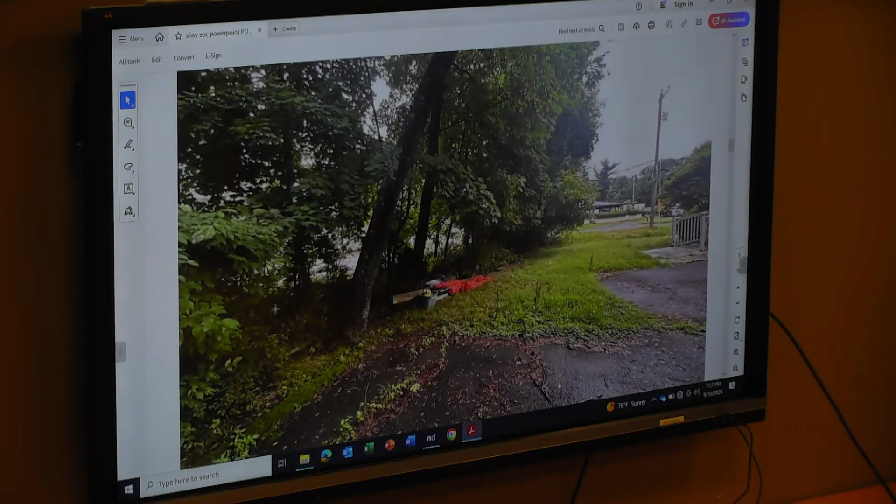And I'm turning to the next picture. This is on the north side of the property, looking over at the Japanese restaurant. You see that there? The watercourse here is not on our property, it's actually on Trader Joe's property, right in here, and then it turns, makes a sort of a 90-degree turn, and comes down across the front of our property on the east side. So it's located on our property adjacent to the street, but it's on Trader Joe's property to the north. And here's some of the trees that are along that watercourse and on our property.

So here's the existing survey. I'm going to load this up a little bit.

Okay, so you have two existing residences here, office buildings that have been used as office buildings variously. The regulated area is called out here, 50 feet from the watercourse. This is an intermittent watercourse, dry a large part of the time. The watercourse itself is here, and it was flagged by our wetland scientist, Alexandra Monk.

These buildings will be razed, and we're going to take the two properties and merge them. They'll be a little under half an acre, 0.45 acres or so. This is in a DB zone, design business zone, which is a transition zone from the central business district. The central business district allows buildings in the Corbin district, part of that. They're going to be 5 stories high and up to, I think, 85 feet.

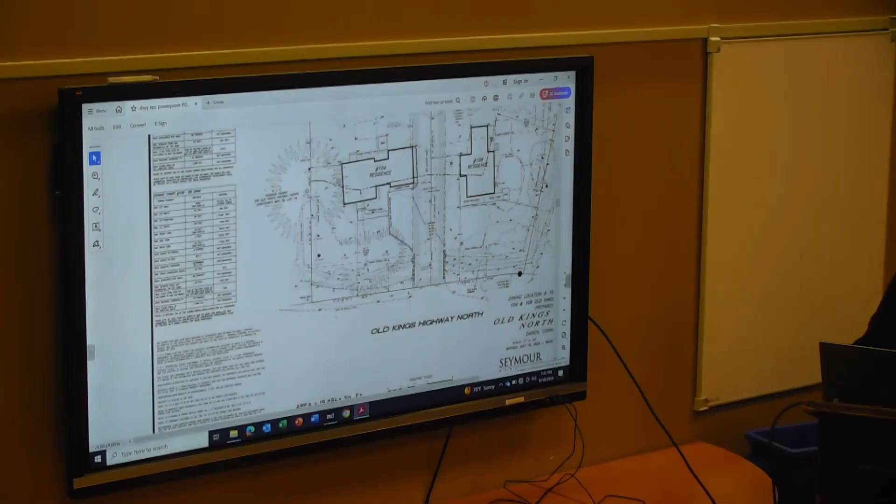These are not units that will sell for a million dollars. A 2-bedroom unit, less than 1,000 square feet, no garage, no pool, no basement storage. These are hitting a market that's different, an elderly market. Elderly under the zoning regs is age 62 and up, so this is not something a young family is going to move into. You're just not going to see that here.

And these are not top-notch units that will sell for a lot of money, but there's a need for this. This is something that's really needed, and it's part of the town plan to diversify the housing stock in town. This fits within P&Z's objectives, and it targets something I don't think another development does. There was a development on the old Noble property that Penny Glassmeyer did years ago—top-notch, really expensive stuff. This is hitting something else. People who want to retire or downsize and get rid of their stuff, because there's no storage room, this would be a suitable place for them.

In terms of impacts you need to look at, it's really the proximity of what we're proposing to the watercourse. I'd like to ask Andy to come up. We are 5.7 feet, I think, from the wetlands here, and that's the corner of the building. This retaining wall—you've tweaked that, Andy, in certain respects, and made a number of other adjustments in light of Joe Canis's comments.

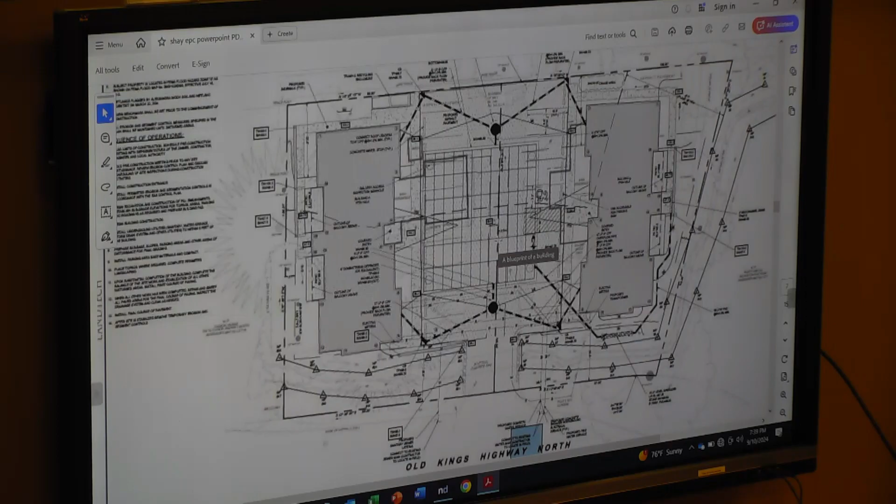It just flows. We're at about 100 feet high here and 97 feet down here, so there's a 3-foot drop from the northwest corner to the southeast corner. That's pretty gradual over the several hundred feet involved.

Water basically sheds into this watercourse, and it does so now without any treatment whatsoever. Andy's design holds on site the water you get in a 50-year storm. It pre-treats it, cleans it so the particulates are gone, and the thermal pollution that you get now will be over.

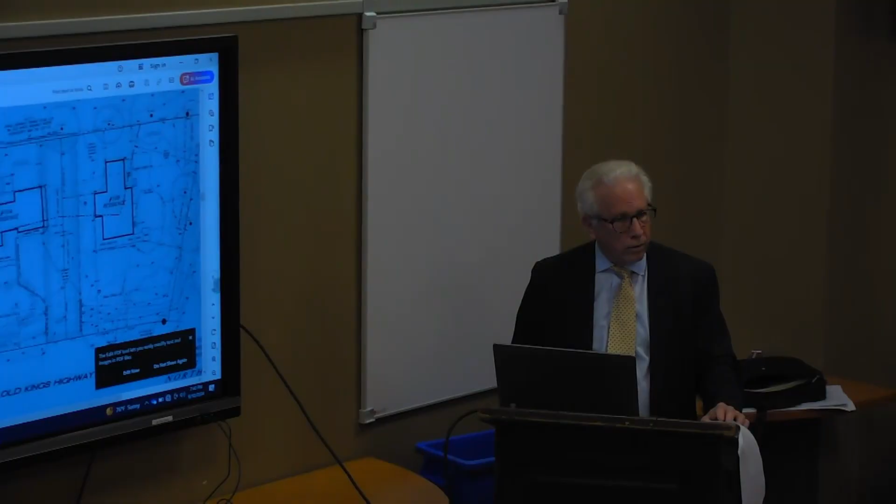So what you're going to get is a significant improvement to water quality. We have also committed to cleaning up the portion of the watercourse on our property, removing debris. If there are invasives there, we'll take care of those. We will remove the debris, and there will be an enhancement plan that Matt will talk about. So while we are close to the watercourse, and this is an intermittent watercourse in a 500-year floodplain, we are going to improve substantially existing conditions as a result of this development.

So at this point, I'd like to turn it over to Andy. Andy, pull up your plan and go through the changes, or if you want to do it just from that. I'm old school, I got the board still. We appreciate that. Especially when this isn't working.

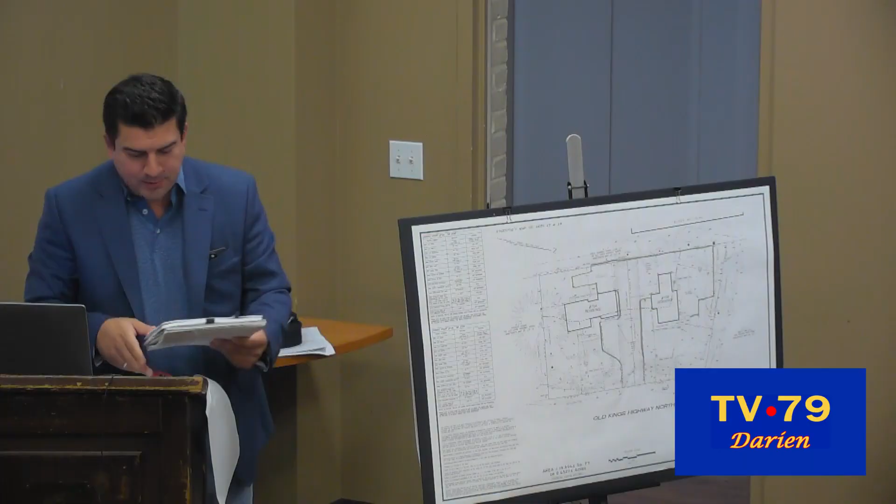Good evening. For the record, my name is Andy Sumalides. I'm a principal and professional engineer with Landtech at Westport. I'll quickly run through the existing conditions, and that's what's shown right here on the board.

As Attorney Pearson mentioned, in terms of drainage, there is no drainage infrastructure currently on the property, so all runoff goes off untreated. Under existing conditions, there's about 10,000 square feet of impervious area, of which about 7,000 square feet is driveway. That's where you get most of your pollutants, from leakage of oils and gases from cars and such. Roof runoff is, quote unquote, somewhat cleaner as it comes off of a roof. So that's what you're looking at for existing conditions.

The property is serviced by sewer and water currently, and we'll need to upgrade those facilities and utilities for our proposed development.

Under proposed conditions, we're looking at about 13,000 square feet of impervious surfaces, about a 3,000 square foot increase. But we're only looking at about 5,600 square feet of new driveway, so about a 1,400 square foot reduction in that driveway. And how are we treating that driveway and roof runoff?

We're essentially capturing all the roof runoff through gutters, piped into catch basins in the four corners of this parking court. You come in here, as you heard earlier, maintaining that existing crossing over the watercourse, and then you have parking on either side servicing each building. Drainage pitches to each corner of that parking lot via catch basins.

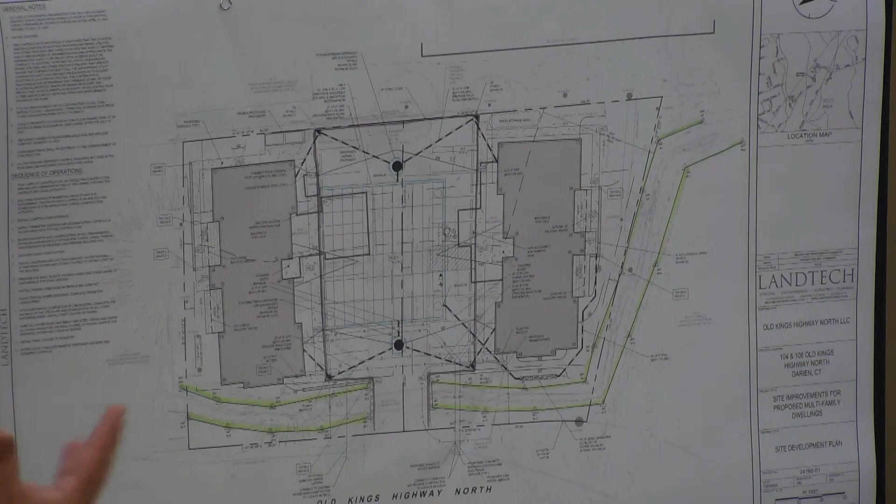Those catch basins are then piped into two separate hydrodynamic separators, basically mechanical manhole structures that treat the runoff. There are swirl chambers and a mechanical system built within those structures that treats the runoff. It removes solids, sediment, and also hydrocarbons and phosphorus. Those are mechanical systems that do that.

Those then get piped into this fairly substantial concrete gallery system, an infiltration system. These are 2-foot high concrete galleries, a very significant footprint. The purpose of that footprint is to promote infiltration and also to provide that necessary separating distance from restrictive soil conditions below it to promote infiltration.

So from a water quality perspective, you're getting pre-treatment through the catch basins, a secondary pre-treatment through these hydrodynamic separators, and then further treatment through infiltration of these concrete galleries. These concrete galleries are also sized to reduce the 2 to 50 year storm.

And as you good folks are aware, in Darien you have to do a fresh meadow approach. What does that mean? We don't get credit for that 10,000 square feet of impervious surface that currently exists on site; we need to take it and mimic it as grass. So our task is to reduce this site to basically a grass post-condition with all of this impervious surface accounted for. That is what the design does, and it meets those requirements.

Overflow from those systems for the 100-year storm would go and discharge to a level spreader in the northeast corner of the property and ultimately into the watercourse and through. So that, in a nutshell, is how the drainage is handled on site.

In terms of utilities, as we discussed, we would need to do two temporary watercourse crossings for our utilities. One is here on the northern side of our entrance, which brings in our water service, fire and domestic.

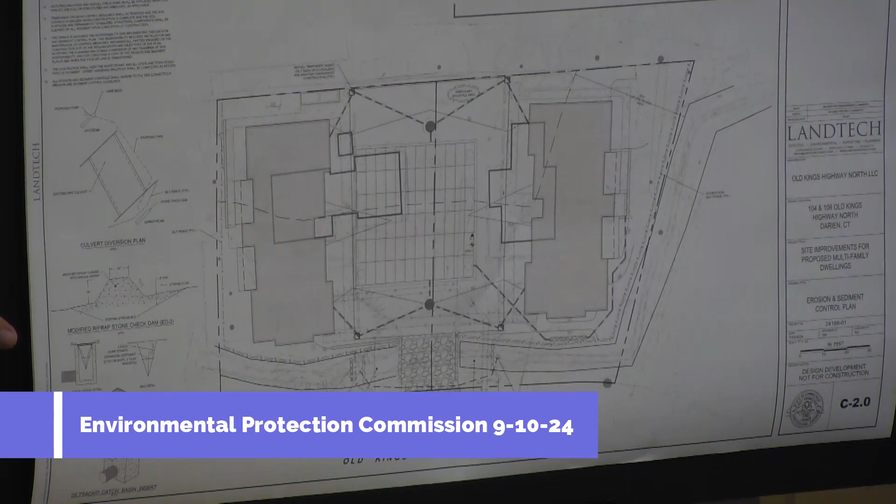And then on the south portion of our existing driveway, through the watercourse, with our new sewer line. As mentioned earlier, electric will go underground over the culvert that exists today and be concrete encased for the minimum amount of cover that it'll have. In order to get these utility connections in, we will do a temporary dewatering plan. For this temporary disturbance, we will be putting in sandbags on the northern end and a pump system, pumping the water around our work area and past.

Again, this is an intermittent watercourse. There's sometimes no flow here, so it's recommended this work is done not during a weather event. We can understand when the weather event is going to happen and propose this work when there's probably going to be zero to no flow. This work probably takes 2 to 3 days max to get that utility in. You could probably do each crossing in a day's worth of work, get the utilities through, and then restabilize the banks of that watercourse. So it's a very quick, minimal temporary disturbance that will then be reestablished, and you'll hear in a little bit from Mr. Popp how that gets reestablished and enhanced as part of our plan.

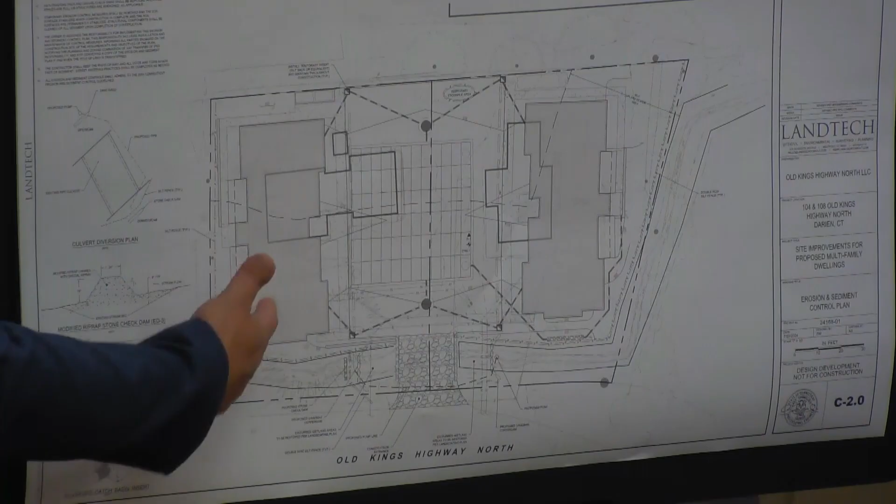Again, there's your typical sediment barriers, double row silt fence, construction entrance, and the such, street sweeping to maintain that disturbance on site during construction and prevent any migration of soils off-site and into the watercourse.

Just to jump back a little bit, we did receive comments in the last week from the third-party engineer, Mr. Canis, who's here tonight, who I think you'll hear from also. What we did in response to those comments, at a high level, is there was concern about retaining walls and how close in proximity they were to the edge of the watercourse banks.

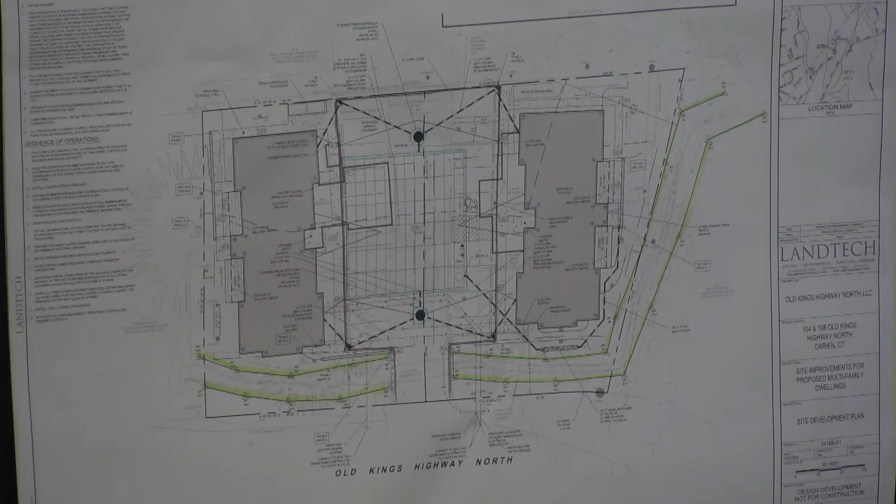We were able to eliminate the one on the north side completely. How we did that was by regrading the slope to eliminate those. We were also able to reduce this one considerably in height. Again, it'll be less than a 2-foot wall, not an engineered wall, no footing is required.

As you heard earlier, the buildings are on slab, so all you need to do is excavate about 42 inches down to put in the footing, and then you come up with your wall and then you pour your slab. So very minimal digging or excavation work is required for the installation of the buildings, for the retaining walls, and for the site in general.

The cut fill numbers on the site are very minimal. It's actually a cut site, and even though we're filling a good portion of the middle of the site to help with our drainage infrastructure, once you install all that drainage infrastructure, obviously there are voids there, so we calculated that, as well as the pavement section required for constructing this. The number is, I think, a net cut of 85 cubic yards.

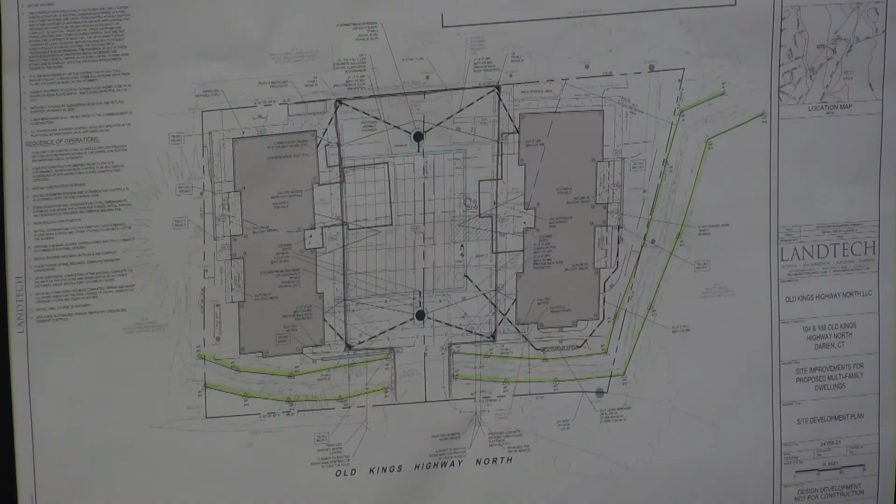So very minimal earthwork is really required and site disturbance in order to make this a viable project.

I'll just run through some of these comments from Tighe & Bond again. There was a question about the existing culvert - it is in good condition. We modified the drainage to overflow to the level spreader before we had it bubbling out of the catch basins, so we revised that.

We talked about the regrading to minimize impacts of walls and such directly adjacent to the watercourse. Some of these are just cleanup items that you already heard of. We talked about the construction of the utilities and the proximity of those utilities to that culvert, and moving the utilities further away from the culvert - correct. So just not to impact the culvert, we pushed the utilities further away to the north and south of that entrance to make sure we don't impact that culvert at all.

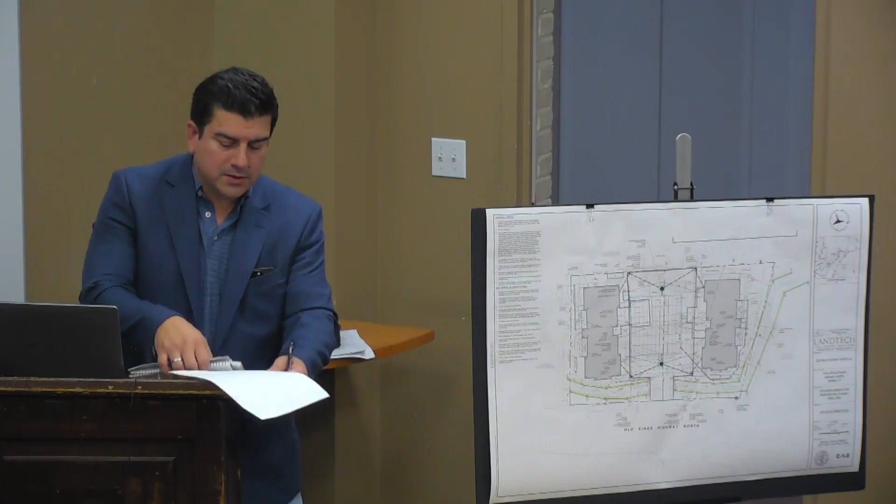And that's in general, the cleanup items that we did in response to the comments from the third-party engineer. We also beefed up the plan in terms of soil erosion, per comments from staff. So we addressed comments we also got from staff in a letter dated August 15th.

Of the items pertaining to the site civil work, items 5 and 6 were key. Item 5 was really piggybacking on Mr. Canis's report and some of those items which we've addressed, and item number 6 was beefing up the soil and erosion controls on the property, which we did. I'm happy to answer any questions, or turn it over to Mr. Popp to go over the landscaping.

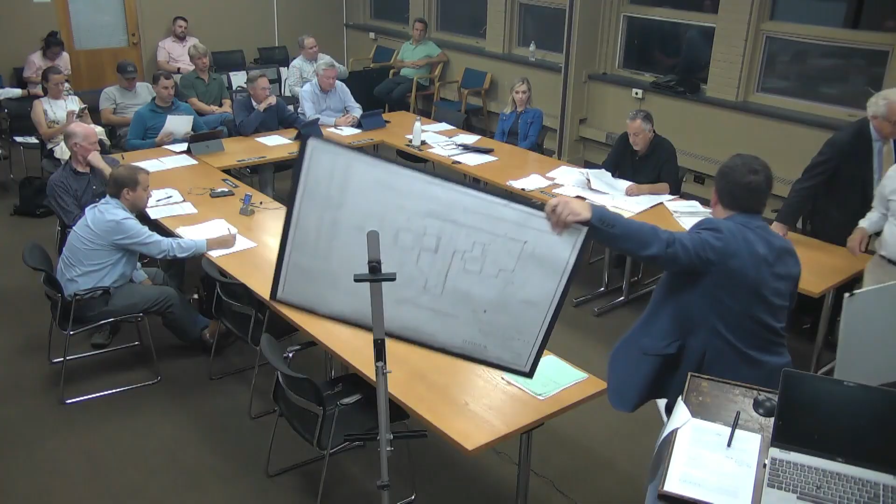Good evening, Matthew Popp, architect and professional wetland scientist with Environmental Land Solutions out of Norwalk. We've prepared the environmental assessment and the wetland landscape plan that we submitted. I was a 16-year member of the Greenwich Wetlands and Watercourses agency some time ago, and have been the Bridgeport wetland consultant for over 30 years, 32, 33 years. We've been doing that, and I've been before you many times.

Just going to go quickly over the existing conditions. As Wilder noted, there are 2 structures on the site. Old Kings Highway North is down here, with the first house here and the second house here. One thing you'll notice when you go out there is there's quite a bit of asphalt, the driveway in the front. Typically you'd have the driveway in front, maybe a little in back, but here the driveway wraps around to the rear of this house, and then wraps all the way around the northern house. So a lot of asphalt on the site.

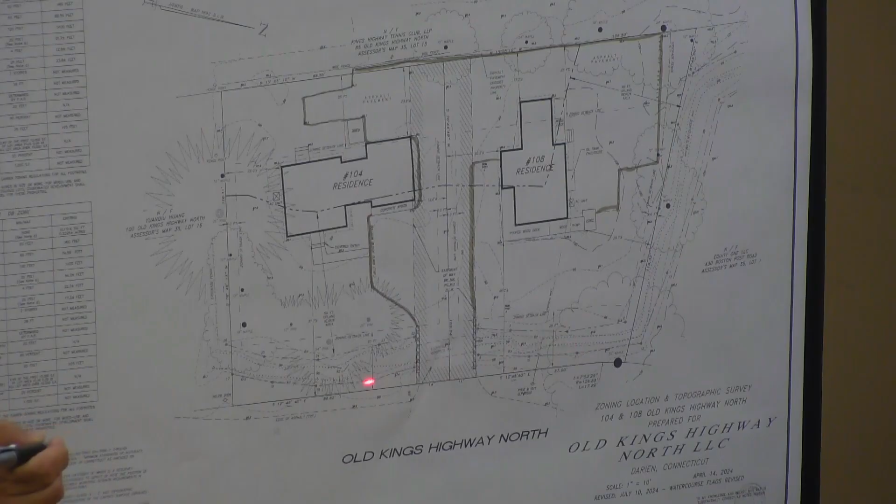The watercourse comes around just off the site on this property line, then enters the site here, comes through here, and there's the existing wetland crossing there. The watercourse corridor has a low flow channel, maybe about a foot deep, 18 inches deep by 18 inches wide. So most of the flow is in that, and when there's a larger event, it overtops that low flow channel.

The vegetation on the site has a lot of non-native invasive plants, as you typically would find in a project like this. But there is red maple, Norway maple, Ailanthus, catalpa, privet, multiflora rose, and some Japanese holly. The watercourse corridor in the front here is about 10 to 15 feet in width. A lot of it right now is maintained as what looks like lawn not too long ago that was left uncut, so the grasses are probably about a foot in height. So most of the buffer around the watercourse is uncut lawn, and there's also white pine, Norway spruce, English ivy, smartweed, jewelweed, and Virginia creeper growing among the field grasses.

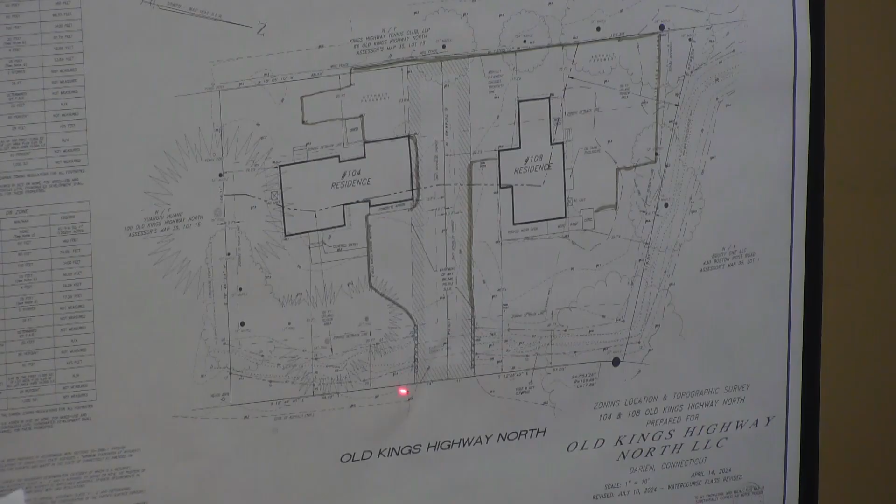The watercourse functions - we use the Army Corps of Engineers booklet for functions - are limited, mainly because of the small size and disturbed nature. The roadway right next to it is only about 15 feet or so from the watercourse corridor. But the primary function, as you'd anticipate, is conveyance of surface water. It does have some secondary functions, like groundwater discharge - groundwater that enters through here comes underground and discharges within the watercourse. It does provide some floodwater storage, as there was some backing up of water above the road. Other functions include sediment retention and nutrient removal by plants through uptake, some minor wildlife habitat, and like most wetland systems, some food for wildlife. Again, those are secondary functions.

This is the landscape plan which we prepared. Again, the 2 existing buildings come down, and we're building 2 new buildings with a central parking area here. We're maintaining that existing watercourse crossing right here. As Mr. Palomelli noted, approximately 5 trees are to be removed - 3 of them over here, and another one right through here.

The drainage, I think, was explained in detail how it's being handled. Right now, there is no drainage system, so any runoff that hits the parking areas or roofs just sheet flows down into the watercourse corridor, with no treatment. The drainage system we're proposing now has a significant amount of treatment, which greatly improves the water quality for the watercourse corridor at the bottom of the site.

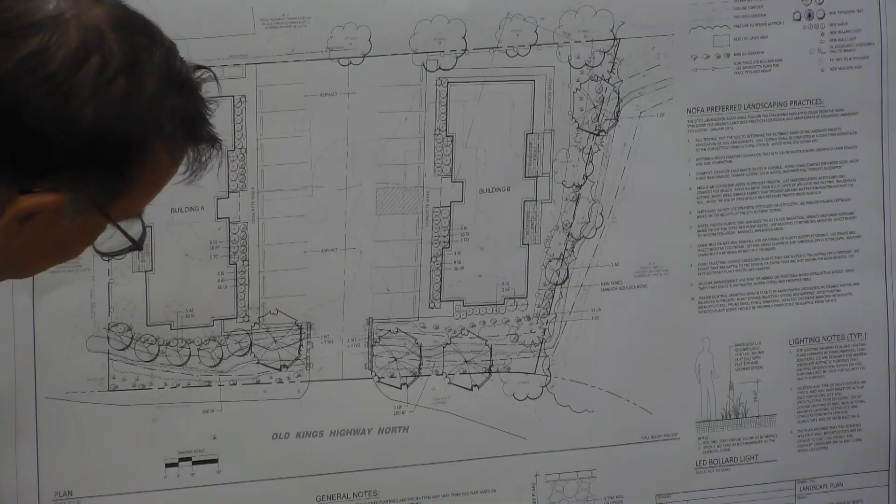And most of these plants are native. I think all of the trees and all of the shrubs, or a majority of the shrubs, are native. There's a couple of ground covers in through here that aren't native.

And just if there's any wildlife issues, just to trap wildlife or repel wildlife in a friendly manner.

Again, it's an existing developed site with 2 houses that are going to be removed. The functions of the watercourse corridor through here are relatively minor. With the drainage plan and the landscape plan, I think those wetland functions would be enhanced. I'll end with that, if there's any questions.

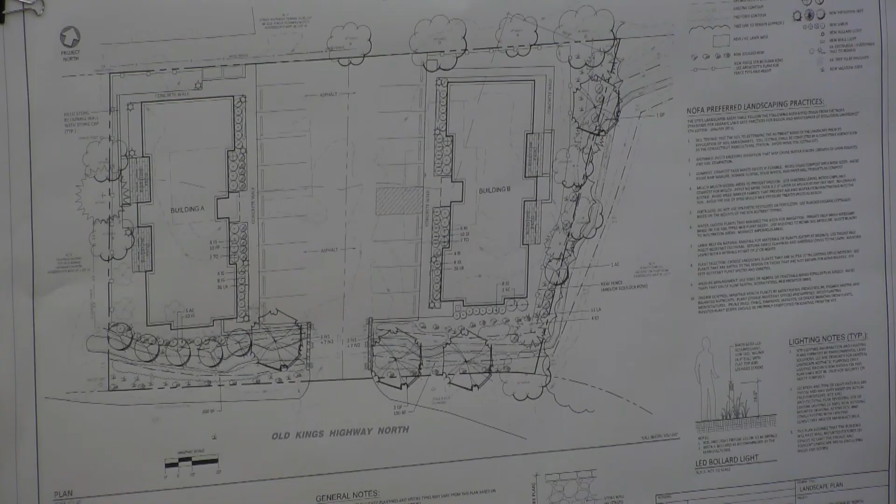I have a question. Do you anticipate any negative impacts as a result of this development on the functioning of the watercourse? No, the only issue I would have is just gotta make sure that we install the utilities when it's a no flow period, and that would be a short-term impact, so no long-term impact.

As long as you're on utilities, Counselor.

Matt, I had a question as I was reviewing everything in the package. So those utilities, the water and fire suppression, are they going below the watercourse? Yes. Bring the expert in? We gotta bring in the engineer. Yes, they are. Good, okay.

The water lines are typically installed below frost, so they don't freeze. So yes, they'll be below the water.

And then the electric runs across the top of the culvert, is that correct? Correct, and it'll be concrete encased around the top of the culvert. Currently, electric is served overhead, but with any new developments, Eversource likes all their lines buried.

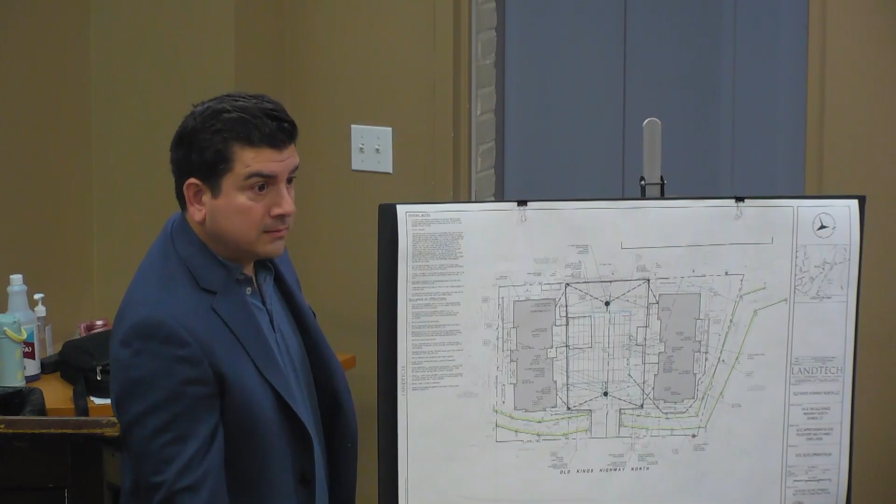So we'd be taking that overhead wire and burying it. Since these are all apparently electric heated units, what's the amperage load that's going in there, and what kind of panel are you going to have? To get heating units in all these units, you're going to have quite a bit of load.

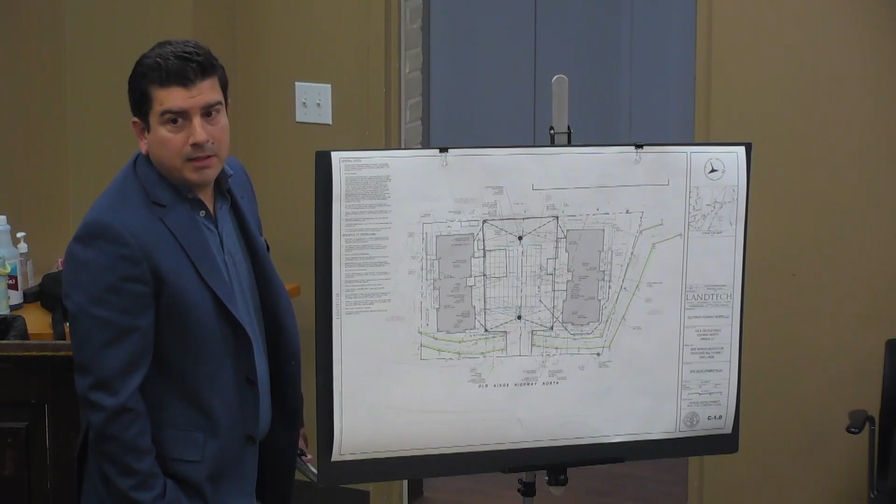Overhead and underground lines, right? It's a little outside my expertise, but I'll try to answer it. We are proposing a new transformer on site, and that's sited on our plan. That transformer is not sized yet. We haven't gone and met with the utility company to determine loads or anything like that. That would be mechanical, electrical, and plumbing engineers when they get involved with the next phase of this. If we successfully make it through your agency and then planning and zoning, that's typically when they get involved, when we get into construction drawings, and then the electrical engineer will provide a load letter to the utility company, and then they'll assist with sizing.

Just thinking of the conduit from the Eversource line on the street, you're going over the culvert, so will you have the capacity to do that over the culvert? Yeah, I don't anticipate it being an issue.

For the record, all utility to building A and building B will intersect the watercourse below the frost line of the watercourse. And the frost line being 42 inches? Correct. So is that 42 inches from the bottom elevation of the watercourse? Correct. So for the record, for building A, what would be the bottom elevation of the watercourse today? So the bottom is roughly elevation 96, 95.

For building B? So that's for these building water lines that are going to cross. So that's for building B, right? 96? So this water line comes through and it services both buildings. Does the same hold true for all the other utilities? So there's one line that comes in for fire and one for domestic water, so it's two separate water lines. That'll come in at one crossing here and then split off and service both buildings.

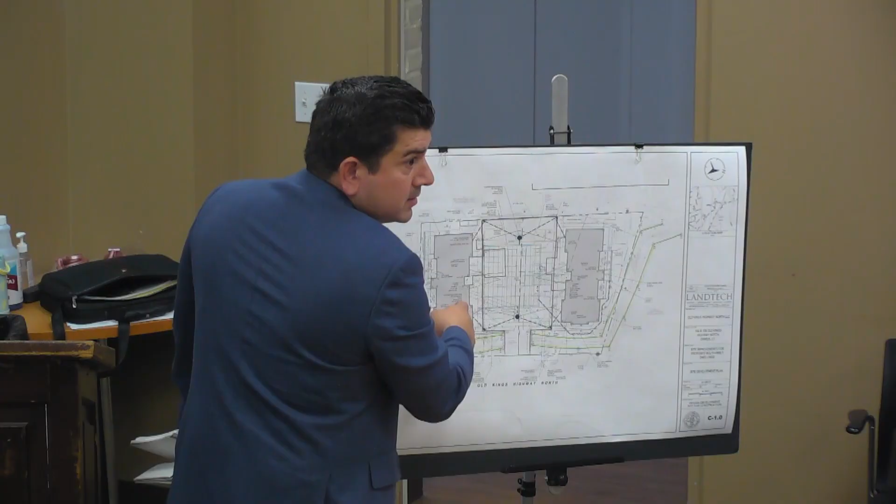Electric will come from this pole underground over the existing culvert to a transformer here, and then that transformer from here will feed both buildings. The sewer will come underground here, and it splits off in two directions.

Is the electric in, let's say, a 4-inch pipe, a 6-inch pipe? There'll be multiple conduits, right? You'll need your primary service, then your secondary, your telecom. All that will be in a trench through here, depending on how many conduits we need. So it's usually one duct bank.

What is the depth of the culvert currently? Currently, there's about 18 inches. So basically what you're going to do is excavate the top of that culvert, lay all of your conduit, your chases inside of the top of that culvert. Correct. And then pour concrete back on top of that.

Correct. And I would imagine a large portion of the top of that culvert would be designated for the electric utility. Correct. So all your utilities will be in that duct bank, and they'd probably be in one line, right? Instead of, sometimes you could stack them, there's different orientation, there'll be one line conduit, in a row, going over the top of that culvert.

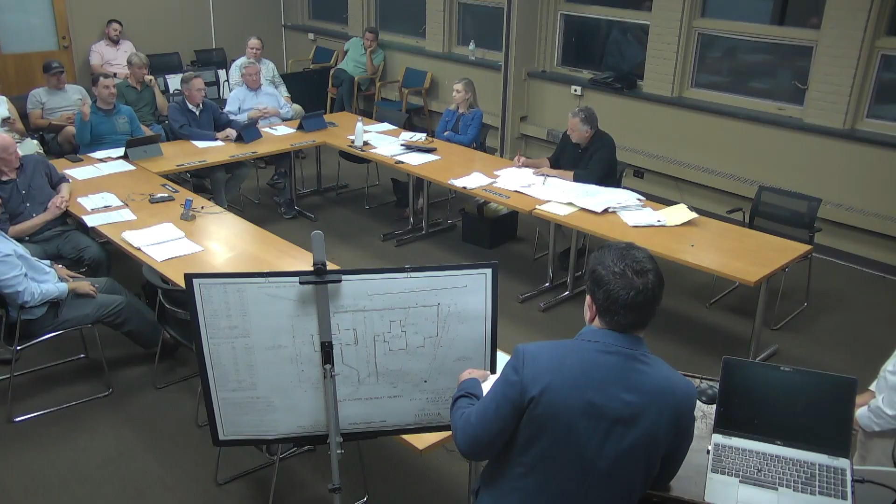So it's germane, because it would be prudent for the commission to know if there needs to be construction on that culvert to meet ingress and egress traffic codes. Because, to the eye, it doesn't appear to be particularly large. When you put two commercial structures on there, one would think you need an emergency vehicle going in one direction and a fire truck maybe going in the other. Can the two fit on that culvert?

Does that meet DPW regulation? I haven't asked that question. We did have a traffic engineer look at it, it's sufficiently wide. And then the other question would be, is it sufficiently strong to accommodate a fire truck going over it and an ambulance going the other way? It's a good question, I can't answer it now, but I'm happy to check. Sure, it's 22 feet wide, and typically you need 20 feet wide for emergency vehicles.

Low volume roads are 20 feet wide. I don't know the regulation, I'm just thinking, it's an old bridge, it's an old overpass. Maybe you need to do work on it. Any other questions?

Go ahead, I have a couple questions. So you mentioned that the underground detention is capable of handling up to the 50-year storm. But in the event that we have the occasional 100-year storm, what happens? So in a 100-year storm, this all fills up, and then it starts coming out of this level spreader.

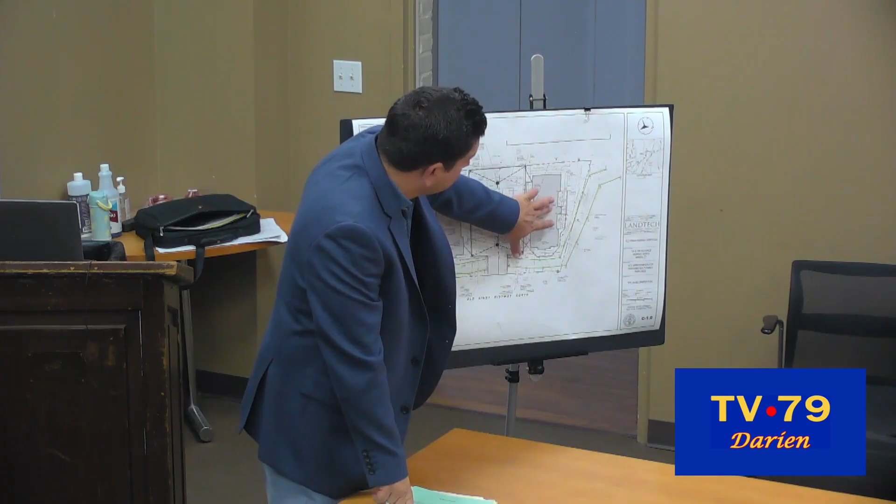It's more of an egress for emergency, not getting into the architecturals, but this is for emergency exit out of the rear of the building. So this is at a lower elevation, so we have a drain here that picks that bit up and directs it to that level spreader. The rest of it, the majority, would sheet flow off, like it does today.

And the size of the level spreader is? The length of it is 15 feet. Okay. And then I just had a question, I think it was in your stormwater management report, it was mentioned that stormwater discharge from the site will comply with applicable rules and regulations of the town of Darien. Can you discuss specifically which rules and regulations you're referring to?

And let's see, I have some, these units are for sale, not for rent, I think. Not necessarily. Oh, not necessarily. Sean is going to look at that, he may decide to rent. Okay.

And can you discuss, you discussed how the watercourse is sort of intermittent, for rain and things like that, runoff. Where does it flow to? It flows to the south and crosses over towards the Goodwives River, I presume. So it meets up with the Goodwives River? Yeah, correct. And on the north side, it's not on your property, it's on the neighboring property.

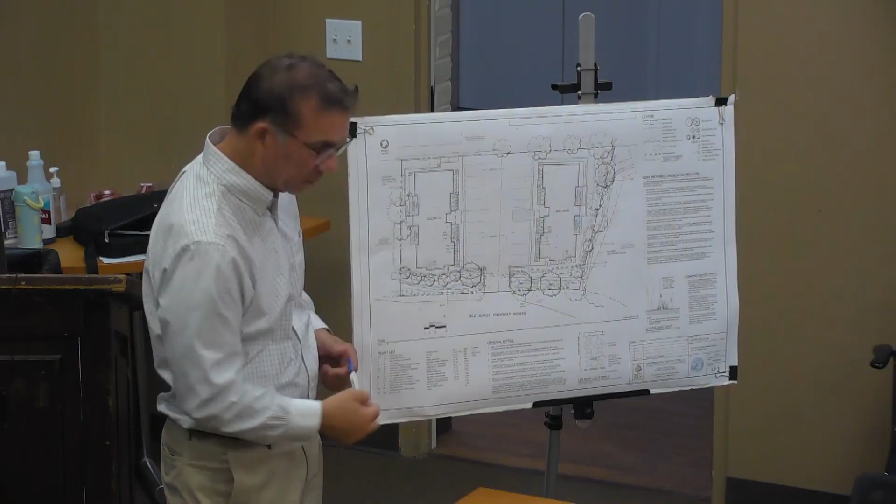On the west side of it they're proposing winterberry, which is kind of a smaller one, grows 6 to 8 feet in height. Those are kind of along the boulder demarcation. In the back we have inkberry, which is an evergreen, a native plant, a little bit native further south than here. The deer don't eat it, so that's kind of why I use it.

And I know sometimes cultivars are brought in for aesthetic reasons. Well, a lot of times too, if you specify just a straight version of a plant, I'm not sure what you actually get once they come from the nursery or once the contractor brings them on site.

The winterberry, I did specify 2 cultivars, male and female, so that we get the berries. The ilex for the inkberry, I did specify one that stays a little bit lower - it's probably the one most used.

So whenever possible, especially in the regulated area, the true natives increase the conservation value of the regulated area as much as possible if we can use those.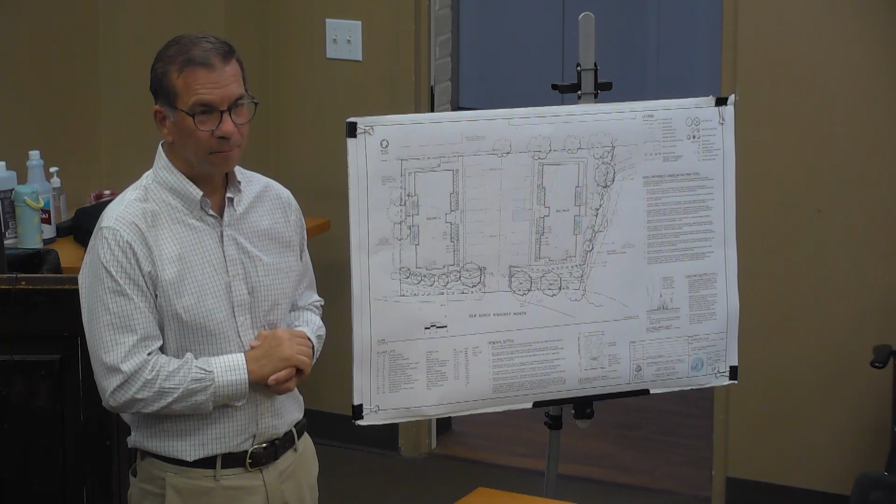Sure, I can. I noticed on the side of the garage, I was there today for my second visit, and I noticed there's a whole array of beautiful blue lobelia growing there, and the bees were just loving it. The deer didn't eat it? No, it was in beautiful condition. I was wondering if there was any way you could put that aside and reuse it somewhere? Certainly, but where was it?

It was on the side of the garage. I'll go check, I'll go look. Yeah, it was doing very well, and the bees were really enjoying it.

And then I think against the west side of the property, it was recommended that some trimming be done to the trees, and there's some invasive stuff there too, the euonymus. I don't know if that's on your property or not. I believe it is off the site. So again, if you take out too much stuff, you're going to have to replace it.

I think some of that stuff might provide some screening, but we're happy to look at that if you want. The deer don't eat it though. Right, they do not, that's true.

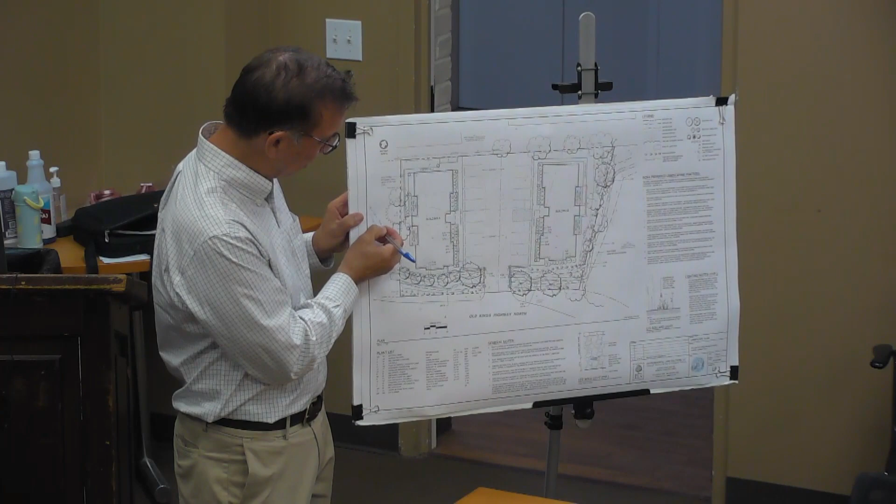I appreciate that you put in here the organic land care provision, but going forward, is there some way to institutionalize that? I don't know if it makes sense to put it in the maintenance and operations manual, like add a paragraph. I would think there'd be an association taking on or maintaining the site, and I would think that would go into that.

Because we did this for another property, it got put on the land record as well, just in case the property changes hands. Yeah, because otherwise no one's looking at the landscape. Exactly, I think that's a great idea, and I think it's something that if you approve this, you should stipulate that be part of the land records. I mean, we're happy to do that.

Okay, I think I might have a couple other questions, but I'm done for now. Any other commissioners? Peter? I do have more, but I don't know if Bill or someone else would like to go first.

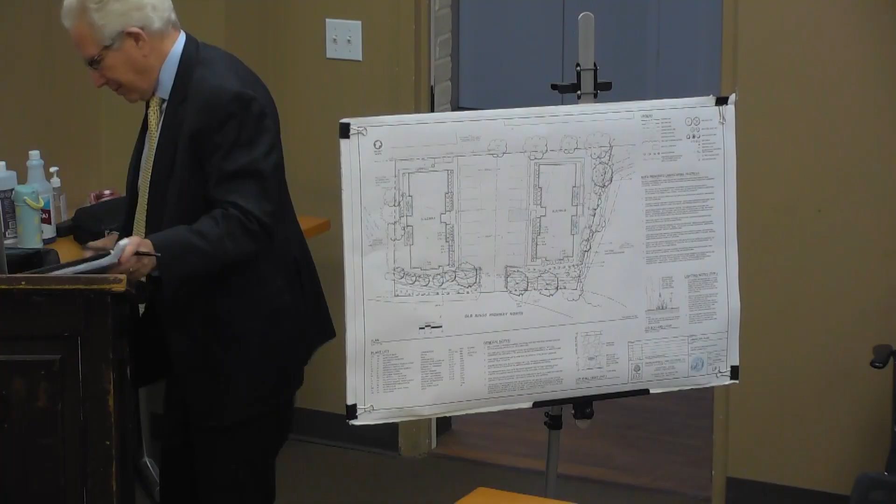Just a quick one. Of the .45 acres, what is the percentage that's developed by the buildings and the asphalt parking lot? I just need the percentages, not acres. 80%, 90%, 70%? I honestly don't know. Andy, did you calculate that in your site plan? No, I'll do it right now.

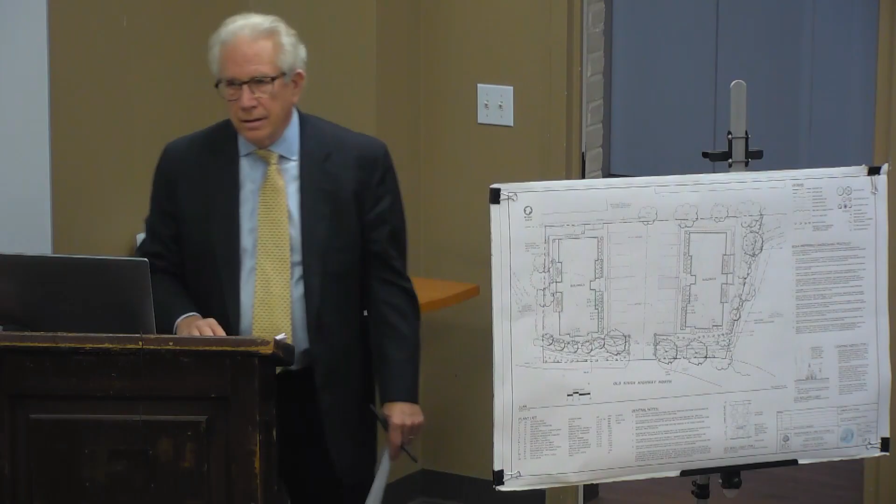We have about 13,000 in the buildings, and then you add the parking. This includes all the hardscape, so that's patios, sidewalks - we have a lot of sidewalks for egress around the building. So all the hardscape is about 65%.

And the other comment is, you have that very large parking lot. I know you need that, but it just screams for a line of trees right down the middle. I know it's a problem with your engineering, your chambers below, but it's pretty brutal looking at it from this angle.

But it'd be a thought. The other thought is, we have a big problem with the river flooding downstream. I know you're going for a 50-year flood zone, but we're trying to impart to a lot of contractors, can you do a little better than that? Can you hold back more water when we get a bigger storm, so it doesn't add to the problems downstream?

We could look at that, certainly. I think it needs to be implemented townwide, versus picking certain projects, because a lot of projects don't come before you, right? They get away with doing the 50-year, but then other folks have to do the 100 or plus to mitigate it. I think it should be townwide, I think that needs to be looked at.

Those rain events are calculated based on historical data and not really a look ahead, so there is an issue with that. But you're asking something special here too - this is a large amount, very close to the stream that we're in charge of here, and you're asking for that to be right on top of it, so we should be able to ask for some little effort to help us out too.

Is there a certain standard you want us to look at? Improve, that's all we're trying to do. A certain storm event, I guess. Yeah, I'm not gonna give you a number on that, but we're just seeing more of it happen.

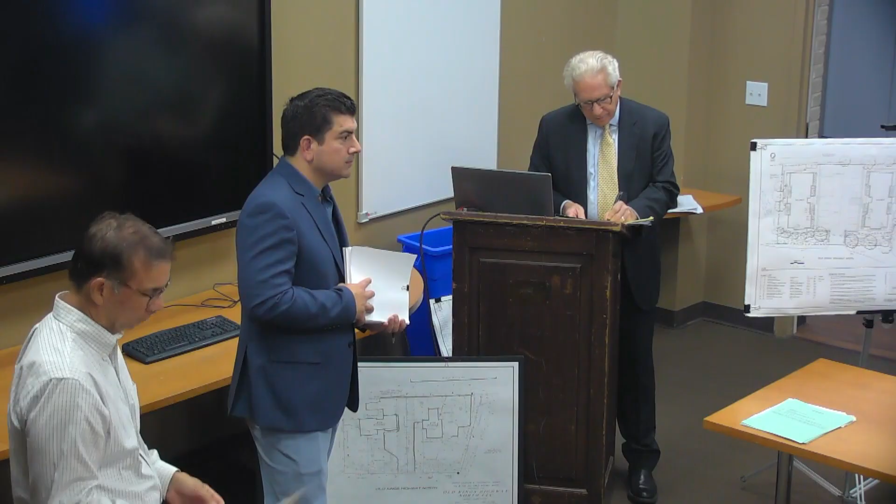We know that stream, that particular piece of it, that tributary is contributing to a problem in town, along with Stony Brook. So the more we can try to figure that out on each new development, the better off we're gonna be. Okay, that's all I got. Okay, Michael, Peter, you got your pen ready?

All right, so something's not making sense to me. You said that 65% of the - how many acres is this property? 0.45, and we have 13,000 square feet. 65% of this .45 acre lot is impervious coverage?

65% of it. You have the buildings, those are impervious, correct? Correct, we have 13,000 square feet. You have the parking lot, that's impervious, correct? Correct. And then you have retaining walls that wrap the perimeter and walks, correct? Yeah, we have walks. Are those counted as impervious surface? Correct.

My eye is looking at this lot, and I don't see 65%. I think a layman would say, oh, that looks like maybe a minimum of 80%. Are we absolutely positive that you are correct, that only 65% of this lot has impervious coverage?

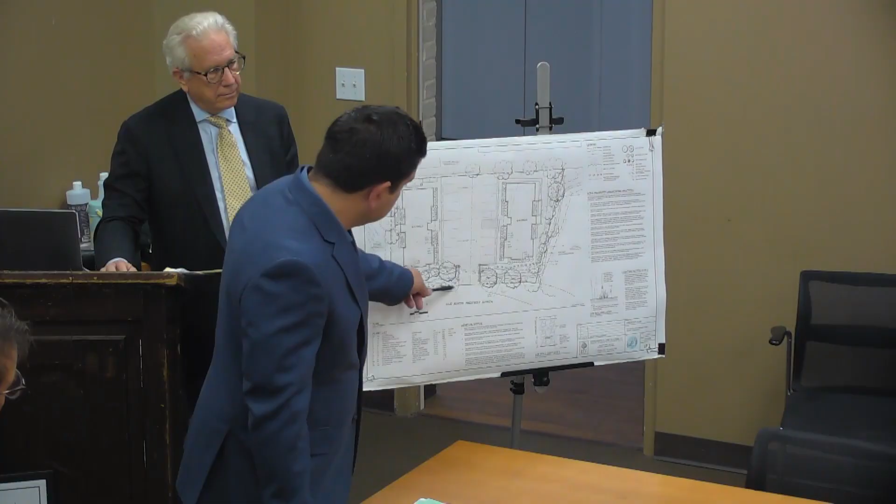Yes. So here's your property line. Why is it that when you look at it, it doesn't seem that way, you understand what I'm saying? No, I get it, but the nickels could add up, right? I think it's deceiving because of the watercourse. So if you look at this, this is all greenery that we're not touching. So if you look around the whole entire perimeter, that's all greenery.

Okay, that's a good point. So have you calculated the percentage of the land that does not have impervious coverage? How much, maybe Matt knows the answer to this, what is the percentage of wetland?

There's no wetlands on this property. What is the percentage of the intermittent watercourse? I want to add, you want to know out of that 100%, 65%, what percent of the 35% is the watercourse. Correct. Well, actually, wetlands define not just the watercourse, but also that area, the 50 foot upland review area as well.

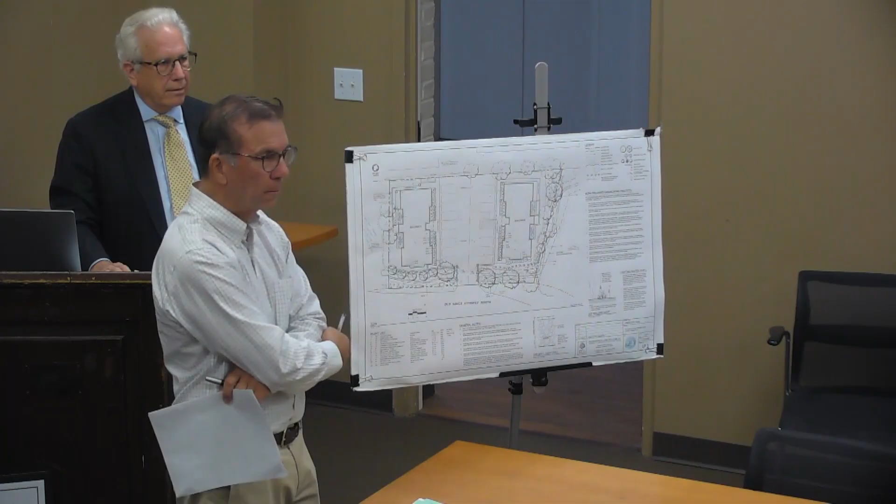No, we're forgetting the 50 feet. No, that's not wetlands, that's the upland review area. It's not a wetland, it's an area that is regulated. And you have control over what happens on that, provided you find that what we're creating is a significant impact on the functioning of the watercourse. You only have a watercourse here, and we are actually improving what happens in the watercourse. And in order to say no, you have to find a significant impact. You have no evidence of a significant impact, Mr. Gleason, from this development on the watercourse.

Mr. Gleason, a commissioner asked a question, and you're going down a rabbit hole right now. Yeah, sorry, but I just wanted to correct the commissioner who said the 50 feet is within our regulated area, it's not the watercourse. It is an area of your jurisdiction, and you can control what happens within that area. It's in your regulated area.

Thank you. We don't have that number. I can give you that number. So what I'd like to know is, of 100% of the land use, what is the percentage of the impervious surface, and what is the percentage of the intermittent watercourse? And then I would say the delta is going to be land that is in the non-upland review area. I'd like to know how, what's outside the upland too. I'd like to see how we surmise 100%. Sure, okay.

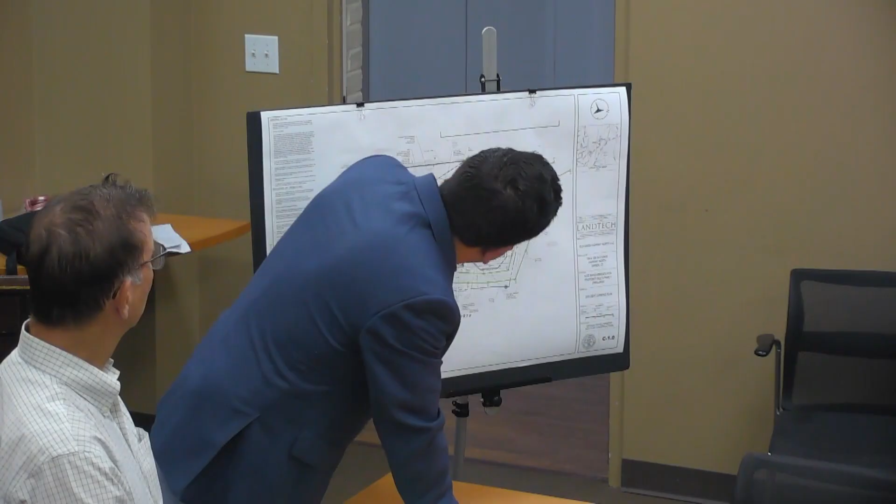Can you point to building B for me? I believe building B is to the far right on your map. Am I correct? Oh, building B, sorry, this wall? Okay, yes, correct. What is the purpose of that retaining wall?

So again, this is the design of the building for egress outside. There's a stairwell here that gets you out at a lower level than your first floor elevation. The architect's not here to describe the components of the building, and I can't articulate it either, but that's an emergency egress outside the rear of the building, and that's what the wall is there for.

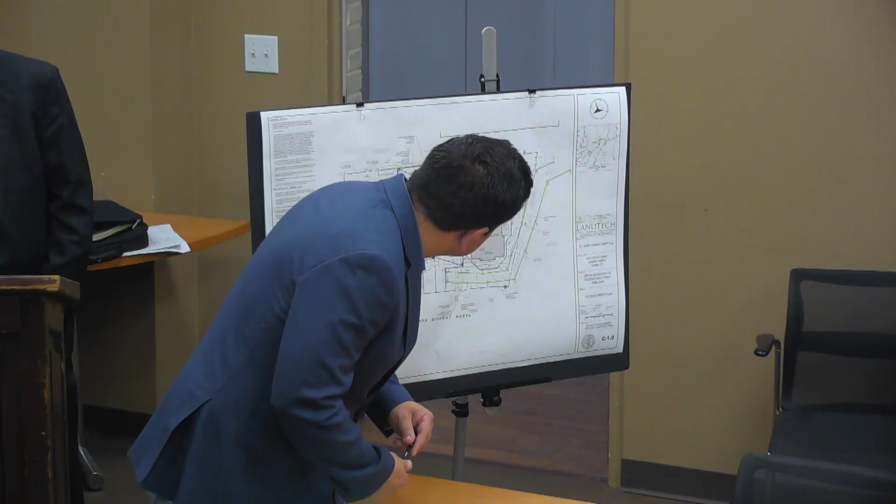So the elevation of the patio is 100? Correct. And then the elevation of the concrete walkway, presumably there's steps that get you from the patio to the concrete walk? Correct. Okay, and top of wall is 100, going back to 100.

I would like to know what the purpose of the retaining wall is. I'm confused by that. It's again for that lower level that comes out at 97.5. You see that in between the two patios? I do. Yeah, so the architecturals were uploaded, correct, to the viewpoint.

In the architecturals you will see there's an egress door that goes out to the rear there, onto that lower patio, or lower landing, and then there's steps that get you up to the walkway and up and around. Is that to hold back the existing grade?

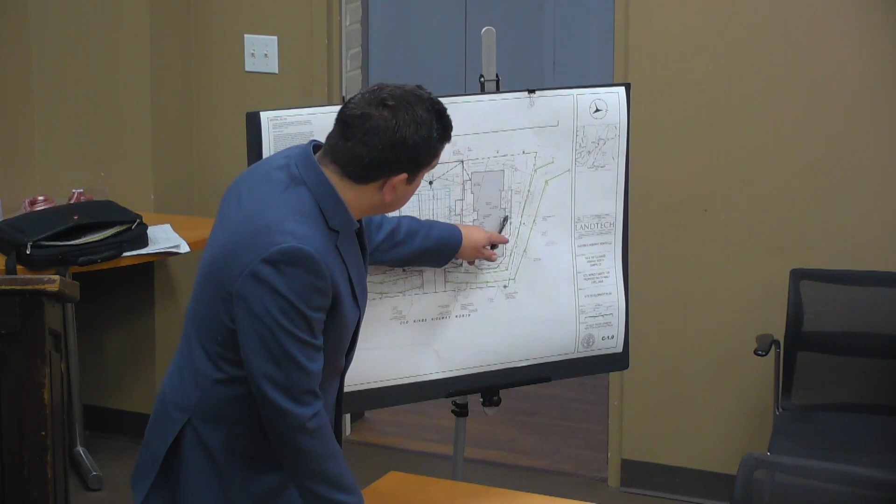Correct, so the existing grade there is at 100. I see the 12-inch cherry, right, and this line here is an existing 100-foot contour. Okay, so we're putting the wall there because that's 2.5 feet lower.

And the watercourse, the middle of the watercourse is approximately 98 foot of elevation in that location? Yes. So the bottom of the watercourse is the same elevation as effectively the walkout, separated by a wall that is 2 feet taller than the bottom of the watercourse. Correct.

Can you tell me the minimum distances? You might have to follow up with Rick on this, but I'd like to know the answer. Can you follow up and tell the commission what the minimum distances are from the wetland, from the edge of the watercourse, the bank of the watercourse, to any structure on the northerly boundary?

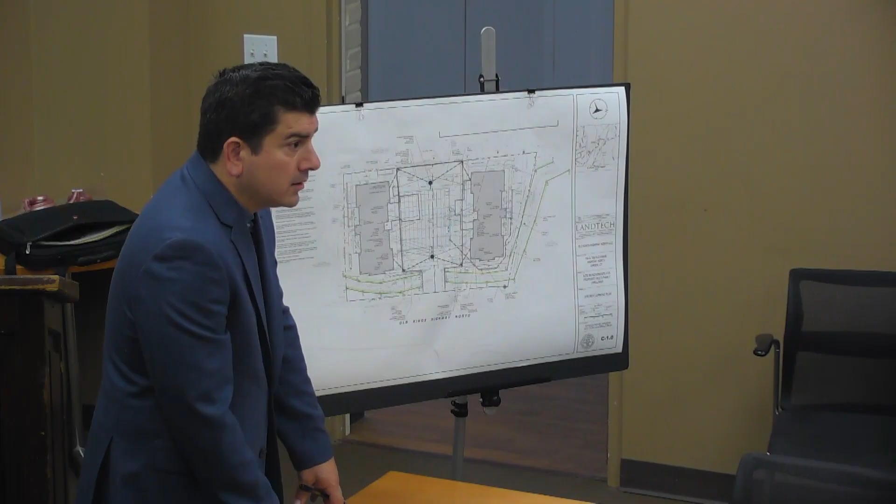So the minimum distance from any structure, whether it be a level spreader, maybe what you can do is any stormwater management structure and the building itself. So if you have a level spreader that's a foot from the bank, I'd like to know what that dimension is, and then what the closest is from the building to the watercourse. Do you want the pavement too? I'm sorry, what's that, the pavement? No, I don't think the pavement is relevant.

I'm gonna hold that one off. I was scratching my head on this metric as well. You made a representation that the net cut on the property is 8.5 yards. So 8.5 cubic yards of dirt is half the capacity of a triaxle dump truck. So you fill that triaxle up to the brim, you could get 200 cubic yards in that, you would agree, right?

Okay, we're saying that you're going to cut, not 200 cubic yards, 20. Yeah, right, excuse me, 20 cubic yards, sorry, that would be a really good dump truck. I know what you're saying, but we're not just fighting for clarity. Yeah, right, okay. I think the analogy still runs.

So, what is the total square footage? Do you know what the total cut is? So, 48 inches for the entire footprint of the building to put a foundation, how much cut is that? How many cubic yards are you removing?

So in my earlier statement, we didn't calculate the buildings. We calculated the drainage and the pavement section in our cut fill. We didn't calculate the footings or foundations in our numbers, so it'll be more cut. So for a monolithic slab, you're gonna...

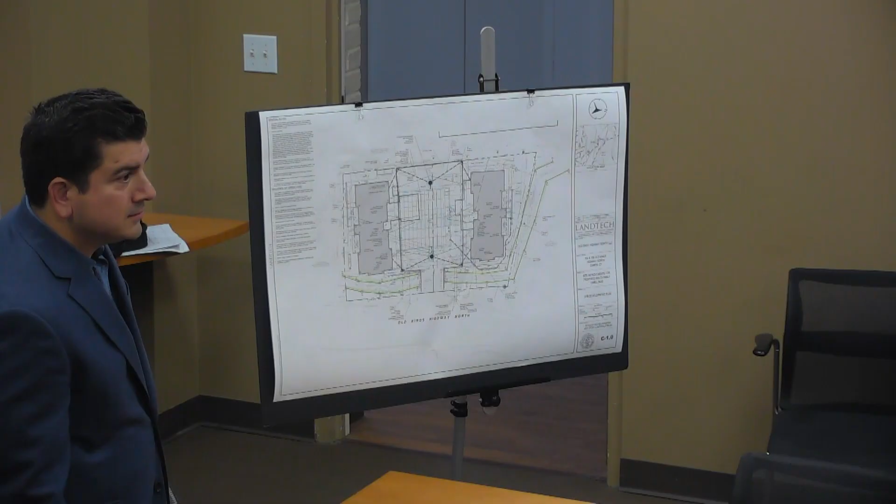I see the concrete galleys here, and I counted them. I think I count 36 galleys. Is that approximately correct? 72. There's 72, okay, I was wrong. Okay, way off. What is the bottom elevation of the concrete galleys?

96.8. Okay. Did you do a test pit, DTH number 1? Is that, yes or no, P-1? No, that's our perk test. Yeah, P-1, correct. Where did you find water on P1? So P1 was a perk test, so we didn't find water in that. We found water in our deep test. So the perk test, the P is for percolation test.

No, I know, okay, you're absolutely correct, and sometimes you dig a perk test and you find water, right? So when you dug where the Cultecs are, where did you find water? So we found no groundwater.

What we found was called mottling, which is seasonal high groundwater, an indication of where the water gets to. It does this discoloration in the soil condition, and it tells you how high the water gets during high conditions. That was 42 inches down. Our perk test was dug 30 inches down, a foot above that mottled layer, and that's where the system lies, and that's how we dictate how much infiltration we get.

So does that make sense to you, I mean, I guess anything's possible since you're just digging the land, but it's generally a swampy area. Does it make sense to you that

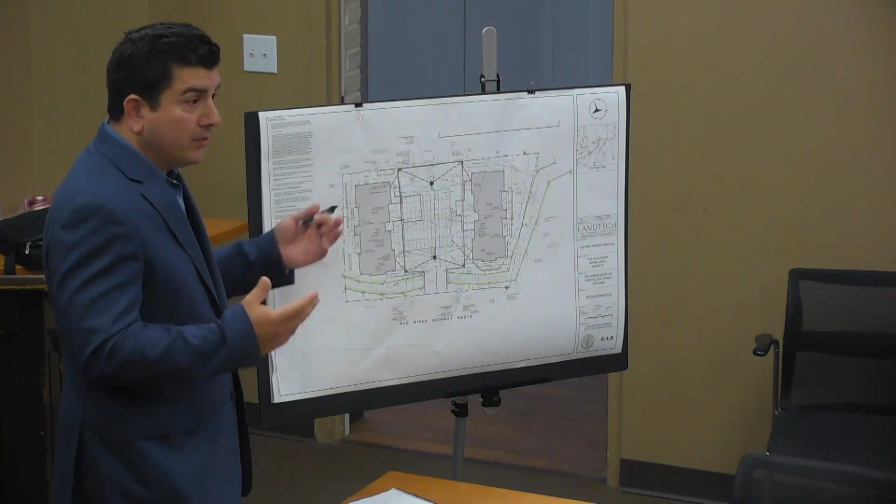If we go out there, that's what the seasonal high groundwater is, that 42 inches down. If you do this testing, that's where we probably would find groundwater, at that 42 inches. So why wouldn't you do your water testing, if you were going to build a multi-million-dollar project, when you know the water's going to be at its highest?

Because we need to proceed with permitting. If everybody relied on just doing it when the peak season is, which is like the end of February.

Maybe here's the answer I just thought of: you don't need to do that because the mottling is there, and the mottling is the high water mark for where the water goes. Correct.

Does the applicant know whether there's natural gas available to the site? No, but we don't intend to use that. No, I'm going somewhere with this.

The Old Kings Highway Tennis Court Club has natural gas. It's fed by an easement over the property adjacent to it, north of it, that fronts on the post road. So they have an easement.

I know this because... but does that matter? We don't front on any street, so if you need to burn gas, you have to have your own tanks. We can't use natural gas. Eversource doesn't have gas in the street. Yankee Gas doesn't serve this.

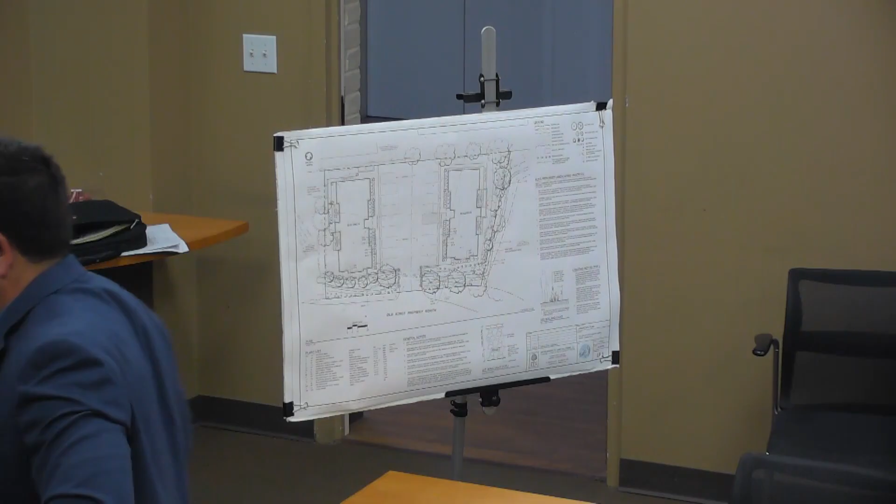Matt, I'm going to have to use my trusty phone to magnify here. You want me to move this closer? No, keep it there so everybody can see it. First question: your drawings of trees, we'll start on the northerly border. Turn your laser pointer on. QP? That's a pin oak. With a big canopy, that's a pin oak? Yeah, if you come down to the legend it has the key, the QP has the scientific name, the common name, and then the size.

Now if you go to the southerly border, where that grouping of trees is, those are existing. So you have a 36-inch pine, a 19-inch maple, and a 10-inch maple, right? Existing, yeah. And if I look at your planting chart, you're proposing to plant 4 pin oaks? Yes. And you're saying the caliper of the tree is 2.5, let's call it 3 inches. With your fingers, what's a 3-inch caliper? Just like that. Okay, 6 inches off the ground, a little...

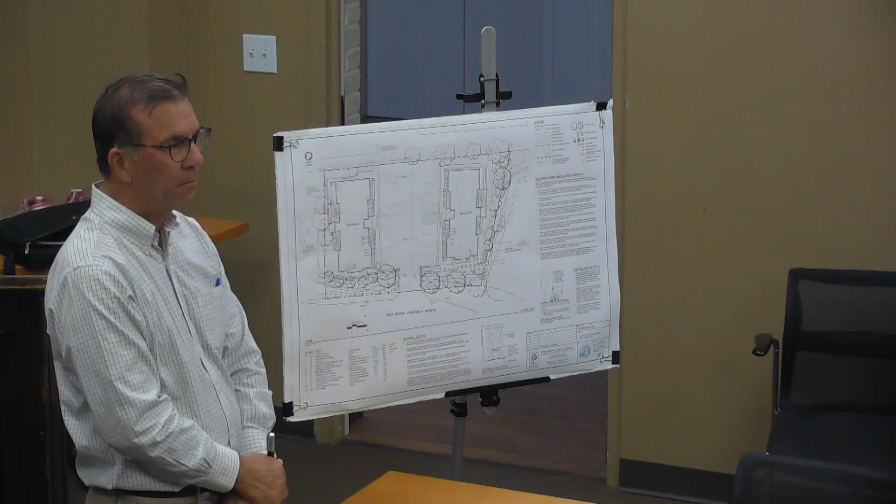This is a 3-inch caliper tree, and on your northerly border, look how big the canopy is. So what I try to do is... Wait, no, let me finish and then you can correct me. You've got that big canopy of that tree right there, and then you go back over to an established tree that has a diameter of 36 inches.

I don't think I can make 36 inches in a circle. All right, go ahead, explain that for me. So what I try to do is the sizes of the symbols, they're not the sizes they go in at, and they're not the sizes when they're mature. They're the size maybe 5 to 8 years down the line.

So this tree right here is 20 feet across in diameter. When it gets big, mature, 40 feet, 50 feet. So in eight years, you're saying that canopy is going to be 20 feet across? Yeah, more, probably, yeah. And then how old would you say a 36-inch one is?

You're saying that the canopy isn't to scale on that tree? No, when you get to the survey, those tree symbols are tiny, like the size of a dime. So I just enlarge them graphically. Again, these are just graphic symbols.

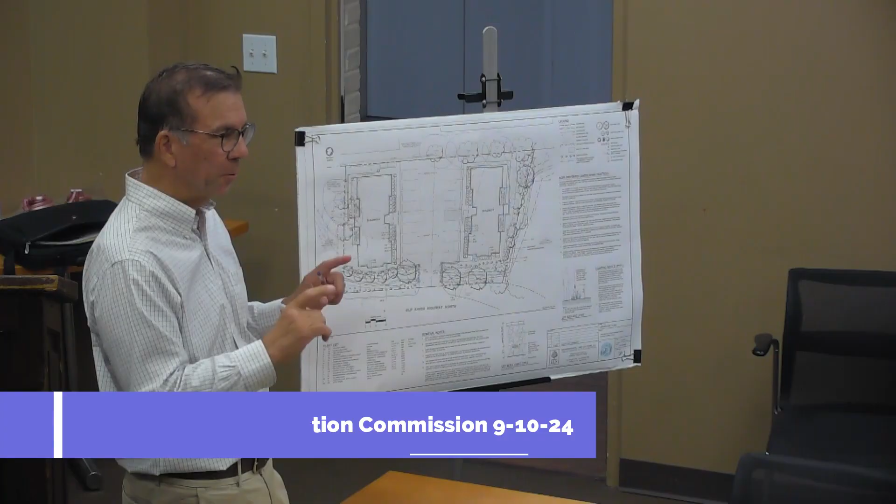After the shade trees, I have the deciduous understory trees, and then I go into the evergreens, which are the arborvitae and the holly, so they're grouped that way. So again, the first groupings are the deciduous shade trees, then the deciduous understory trees, then the evergreen trees, then the shrubs, then we get down to perennials at the bottom, and if you have vines, I usually put them last.

So you have four thujas, so some like, I don't know what, DeGroot's Spires, but they're not green giants, they're skinny. Yeah, this is narrow grown. And you have ilex, is that kind of like a shrub? The holly? No, that holly will grow probably 40 feet or so. All right, kind of narrow grown.

Those are back here on this side. So you have, it could be a shrub too, but, okay, so 10, 14 - so you're planting approximately 14 what would grow to be large trees.

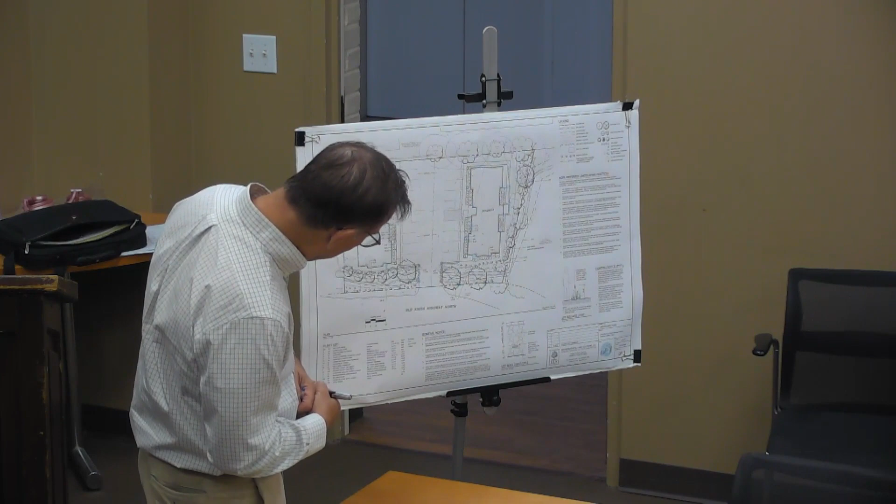It's separating from being an ornamental tree. Yeah, I wouldn't probably call the arborvitae a large tree, that's an ornamental. Yeah, but it's for screening purposes, so it's narrow grown. And where are those on the map?

I knew you were going to ask, let's see. So there's one here, and there's one here, and there's one here, and there's one here. So those are more ornamental, upright, skinny, and frame an entrance.

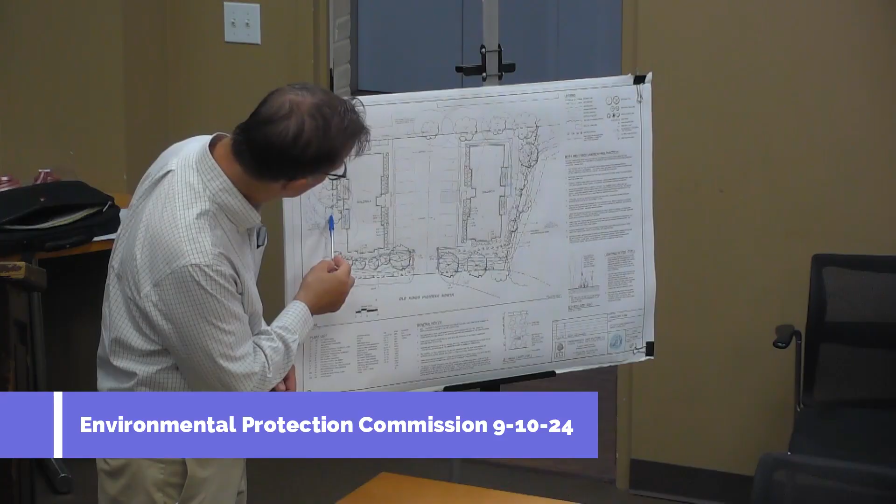This tree's a maple, probably a Norway maple. That small one is a maple too. They're actually all maples, probably all Norway maples to begin with. So I think we're going to have to come back to you with some specific recommendations for each of those trees.

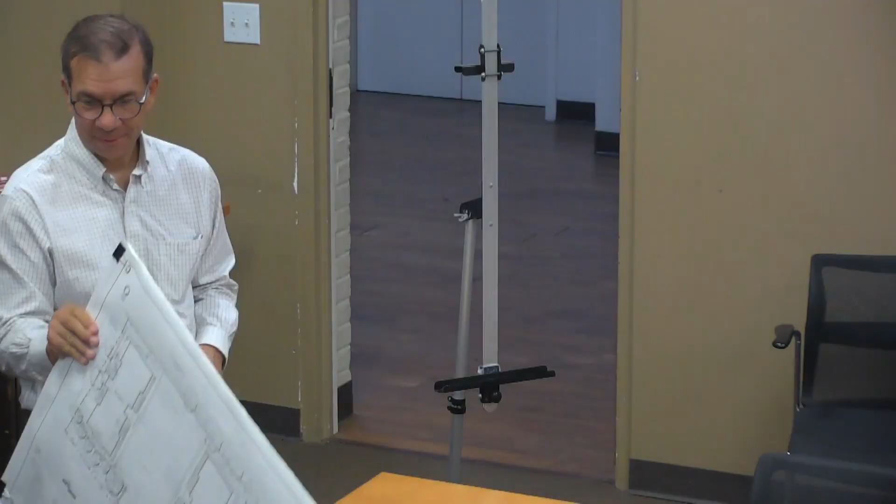The parking meets the regulations, which are designed to be effective, not just for numbers, but also the design. The design is specified in the zoning regulations - how much backup area you have to have, the size of the spaces, and 90-degree parking is the easiest for people to use. You come in, turn in, and back out, provided you have sufficient backup. That aspect is something P&Z cares deeply about, and it falls within their jurisdiction.

I think you're asking questions, and I'm not sure where we go with that in terms of how it affects EPC. I'm very interested to hear what Rick has to say, and I think the commission is welcome to ask any questions to evaluate an approval or a denial of an application.

I think it's germane to prudent and feasible, because if we're fitting 10 pounds into a 5-pound bag, and we're asking for some retraction of the size and scope, whether it's the parking lot or the structures, that alleviates us from impinging upon the 50-foot upland review area. So I think it's very relevant.

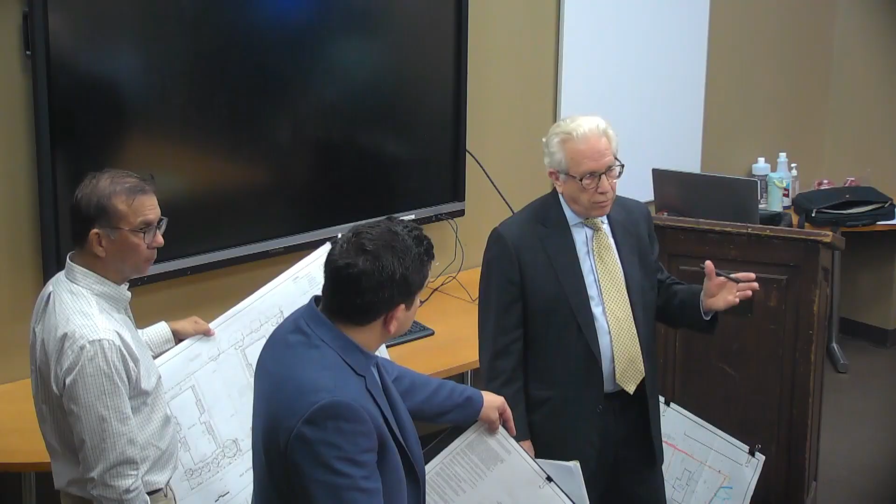You know that roughly three-quarters, two-thirds of this site is within either the watercourse or upland review area. So anything that happens here is going to require your approval. And I understand your concerns, but okay.

Just to Rick's point, the other question I didn't bring up - we've seen culverts like this in front of residences, and ultimately we've seen applications to cover the culverts because of safety issues. I'm thinking you've got elderly people driving around this corner, one of which has some limited visibility. Will there be further applications to cover the watercourse, and are there going to be fences? I'm thinking about practicalities, and I think the question Rick's asking is about practicality here.

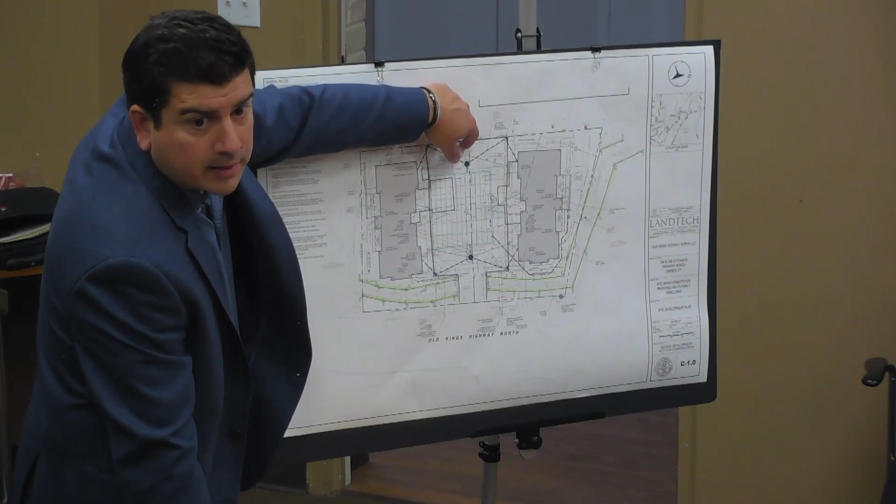In terms of the parking spaces, this seems like a parking space, but this last one here is not - well, the one with the curb stop is, but the other piece in the back is not. So the dumpsters here get rolled out, and the truck has to drive in and pick up the dumpsters, then back out. And what about this other parking space here? In this one, there's enough room to maneuver and come out.

We have a traffic consultant for the planning and zoning portion, and he ran truck turning movements and car movements in this parking lot. We can submit that as part of this application if you want - we're happy to submit the traffic report, which documents the turning radiuses and access, et cetera, including emergency vehicles.

I'm just trying to think how this is going to potentially change, or, as Peter had mentioned about the safety, you're only a foot or two from the edge of the watercourse, so there's no real way to maneuver around the buildings. So maybe it's less lawn and more mulch.

Are you at exactly what you need for parking, or do you have excess parking? We must have 18 spaces to do 12 units. How many spaces do you have? 18.

Because the question was, could you put the buildings closer in the middle to have more buffer around? No, the parking has to be a certain distance, I think it's 18 feet. No, you don't have room - you've shoehorned everything in, you have no room to move.

It's a total new look, I think. It's not like shifting things - it's either shrinking things, which we talked about and isn't feasible, or it's a design that went down the path of planning and zoning that didn't work. It's important to point out though, we've talked a lot about planning and zoning absorbing some of the concerns.

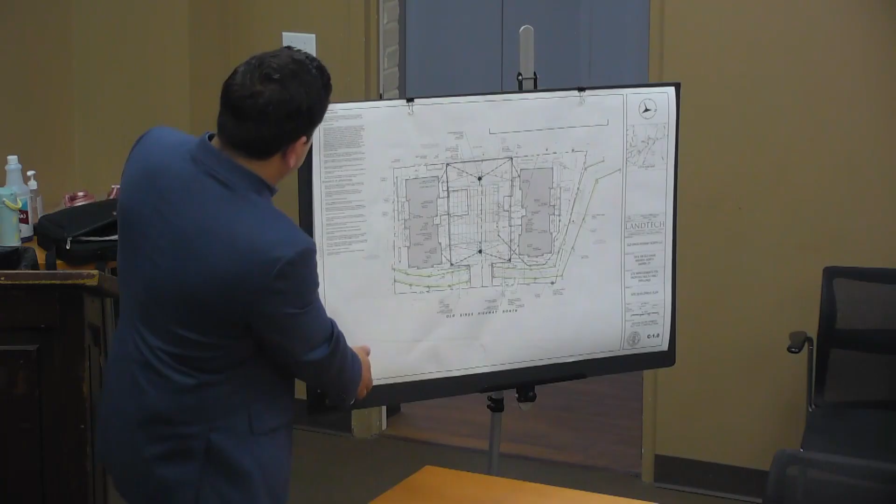Did you put in, I didn't see the new plan yet, but you have, because you were being responsive to Joe and my comments, is there phasing and logistics on the plan? I think we have, yeah, sequence. Right here on C1, sequence of operations. See that? Well, it just says begin building construction, I didn't mean that, as opposed to more definition. Right, we can probably expand on that with greater definition, Building A, then Building B.

And we all talk about alternatives, and it doesn't just relate to buildings and so forth, I just worked on a pretty expansive project over on Thorndale. Did you look at, aside from the big picture items, the buildings, the parking, etc., did you look at different surface treatments to reduce the total amount of impervious, because the numbers are big, well they're still being determined, but the numbers seem pretty big. Did you look at alternative surface treatments to reduce the amount of impervious, or is it not appropriate given the site constraints and conditions you have there?

We did, we can look at it. I'm not a big fan of porous asphalt, the maintenance thing, not a big fan of it in the Northeast. I know they love it down in Greenwich, we use it often there, but we typically do those in parking stalls, so we can look at that option. This needs to be some type of hardscape for ADA, getting out of the buildings, right? And there's very minimal patios, we could probably look at those 4 little patios and do some type of pervious material for those. But it's really the parking and the building that's gobbling up most of that impervious surface.

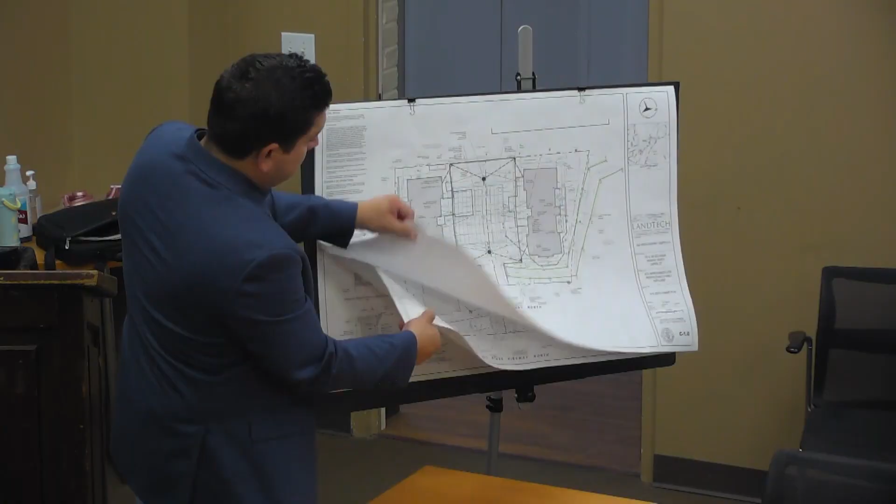And I see today you added oil and grits, is that an oil and grit separator? Yeah, there's 2 of them. Okay, do the catch basins have deep sumps and outlet controls? If not, I'm sure you'll make it a condition. So you should get some separation in the catch basins. Yeah, we actually have 4-foot sumps. Do you have 4-foot sumps? Yes.

That gets you about 10% TSS removal. And do you have it in there, like an elbow? Typically, yeah, sure. I don't see it in the precast catch basin. No, we'll add an elbow. Thought that was standard in our note there, but we'll add the elbow on the outlet pipe.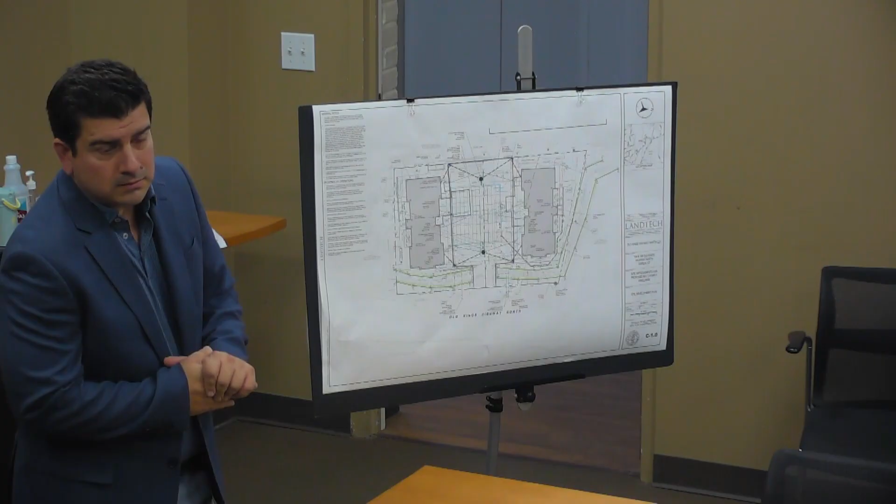The watercourse crossing has some additional detailing that needs to be done for your water handling plan. So you're going to use sandbags? Before you were pumping water back into your excavation. Yes, that was the original plan. So you're going to sandbag both ends and pump to the outside.

Right, Mr. Canis brought that up also. My response was exactly that. We're going to do this when there's no flow. We don't anticipate much or any pumping needing to be required in order to go through this and do this.

There was reference made to the Connecticut DOT manual. The DOT manual is really for like a 3-month-plus larger type projects, where maybe this is access to development, like if this was currently inhabited and critical in terms of people getting in and out of the site. This site will be vacant, it'll be all demoed, it'll be a construction site, so there's no need for some type of emergency access coming in and out of the site or any impacts to that culvert.

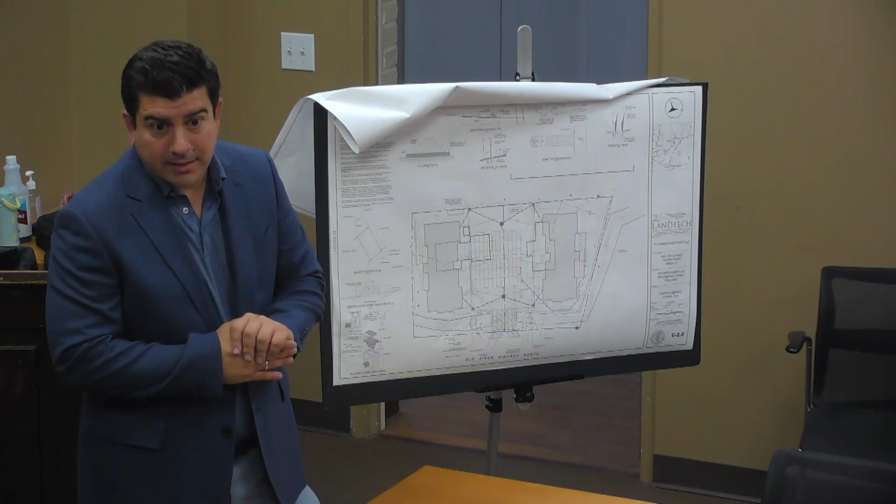We don't anticipate much pumping needing to happen to get these utilities done. But there's a plan in place, for sure. So you'll be doing additional details for the third-party engineer on how high you can put the sandbags, using a 1-inch pump, not a 3-inch pump. But it's really going to be nothing more than to keep this very dry.

Minimal. You're probably building these — I think, Matt, you said the channel's like 18 inches deep at this spot. In terms of the lower banks, we're not going much higher than that. No more than 3 feet high for sure on the sandbags.

You've done a lot of work on the plans since we initiated, but I think the important things are us raising those issues, and the big thing is what alternatives have you looked at, and what's possible, and of course we want to make as lucrative a deal as we can for the project, for everybody, for sure.

I think it would be beneficial to have the architect here at the next hearing to talk through some of those alternative building designs.

Can we also ask that you stake the property line along the north side so there's some clarity there when you're on the site? And also the front of both buildings, so we can visually see how close they are to the east side, to the watercourse.

Stake the corners of building A and B, that's a good idea. The two front corners? I'd say the rear corners, the corners that are exposed to the watercourse. This corner and this corner? No, this corner, there you go, and this one, correct, and then keep going. And this one? Correct. And this one? Yep, you got it.

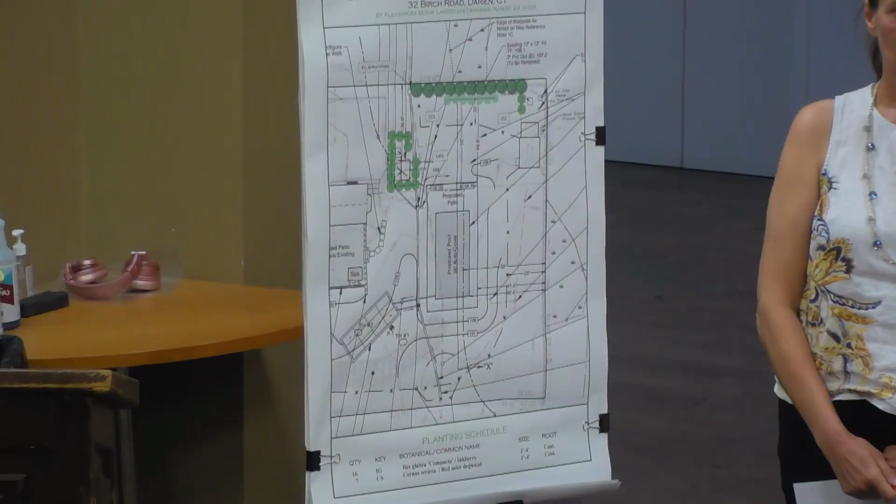They have to do a water handling plan to construct the pipe first. There's a logistics plan of how they intend to do that—they're basically building the alternative drainage and then connecting it. So those are all listed on the plans.

The only thing the staff would suggest is verification of the driveway catch basin, that it should have—and it may need to be replaced—a full 2-foot sump and outlet controls in it. That's the only thing above and beyond what came from the town's consulting engineer, and you've made a note of that. I've made a note of that.

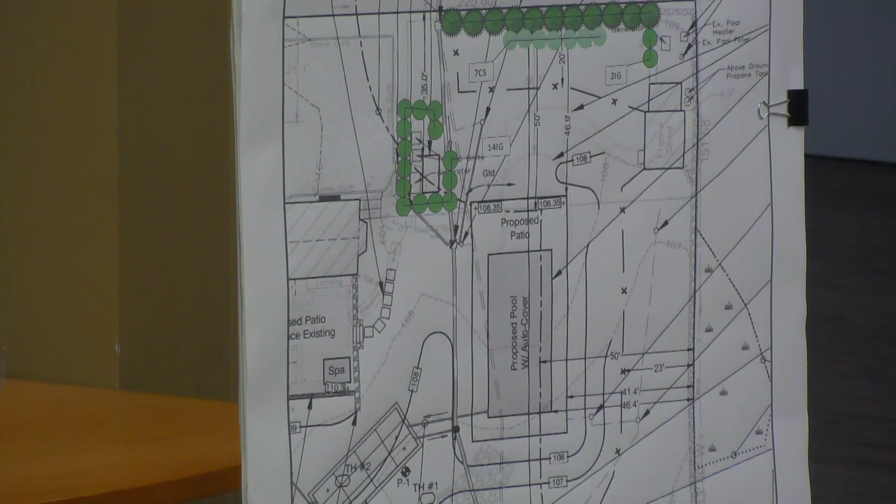Aleksandra's also provided a basic planting plan at the request of the agency, including things like inkberry, red osier dogwood, basically along the perimeters and the site's wetlands, to provide not only screening but enhance the conservation values of the property. They'll also be screening out some of the structures and features being proposed. The applicant's been very responsive, mitigating some non-compliant locations for pool equipment and so forth, moving them into more compliant conditions, screened with landscaping.

I'm available for questions. Aleksandra's here, she's done a great job pointing to things.

My name is Aleksandra Moch, wetland soil scientist and landscape designer. With us tonight is Mark Ochman, he does the engineering, but he's very sick today, so if you can limit him to just questions, that would be great.

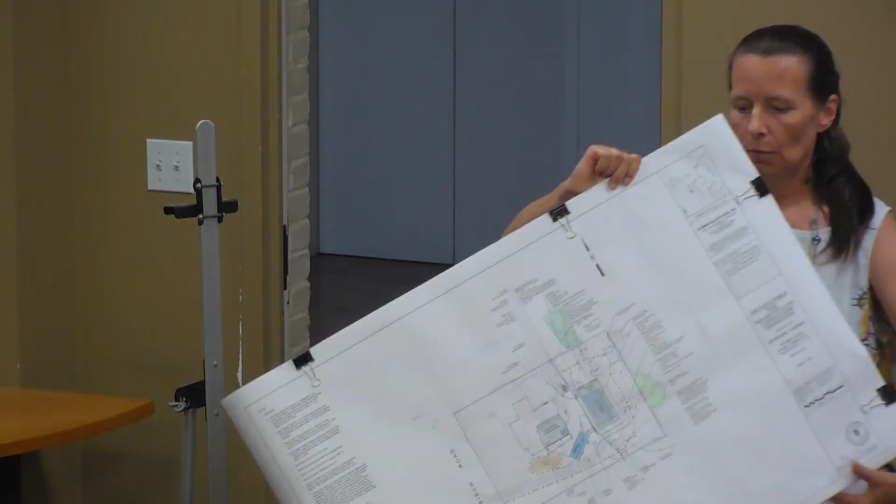We are very confident that this project will have no impact to the wetlands. Usually when you do construction, you expect two types of potential impacts. There's a short-term impact, when you disturb the soil—we're going to be removing the old pool and replacing it with a new pool. We're going to be relocating the pipe for drainage, and installing the drainage system and pool equipment. During this process, we're going to use proper erosion controls.

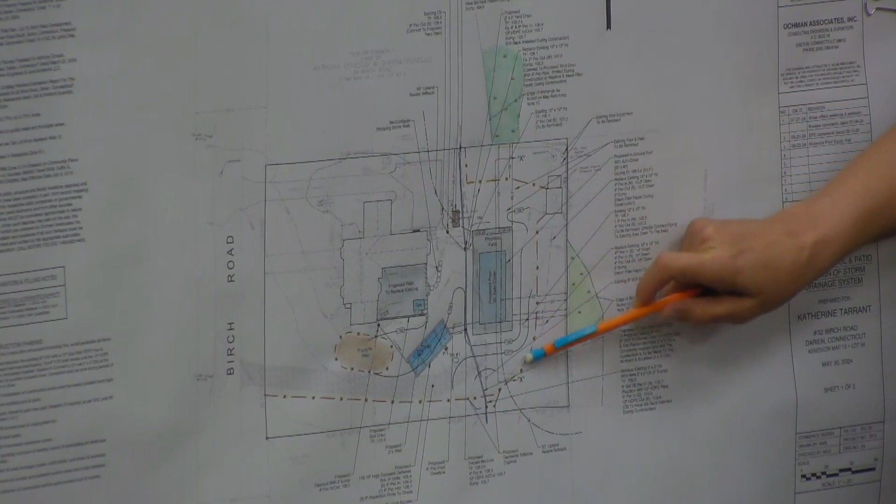Here's one wetland—this is actually a potential wetland, wasn't confirmed. But we have the proper erosion controls here, and here's the historic wetland offsite; we're also going to be protecting this one. This one is, in addition, protected by a 2-foot wall, so it's higher than we are, so the water doesn't travel up the hill—this wetland is safe.

Also, we are going to have a proper anti-tracking pad getting to the site and getting out, so there will be no siltation on the road, and we're going to have a stockpile area which is also going to be surrounded by proper erosion control.

The long-term impact—there's going to be none. Usually long-term impacts are related to the increase of impervious surface. We are going to be increasing impervious surface, but this is going to be all mitigated with the stormwater management system. On top of it, we have the planting plan, which is going to limit the area of the lawn and beef up the buffer for the potential wetlands offsite.

And also we're going to have evergreen Ilex glabra, which will provide a beautiful hedge, not only for wildlife but also for screening the pool equipment. I'm here to answer any questions.

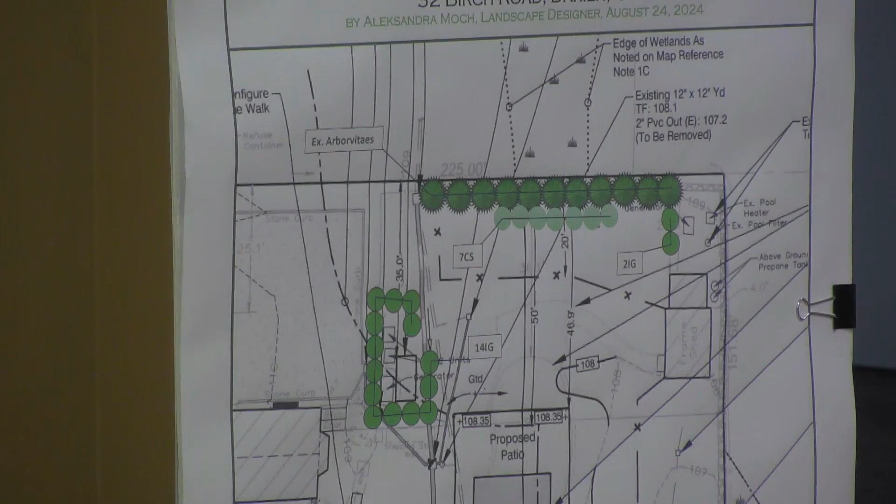I had only one small question. The pipe you're relocating serves what? This is an old drainage system that runs through the neighborhood. It was inherited, and unfortunately it crosses the area of the proposed pool. So the pipe, you can see here as a dashed line, is currently here, and we are relocating it outside of the pool. This actually runs throughout the neighborhood.

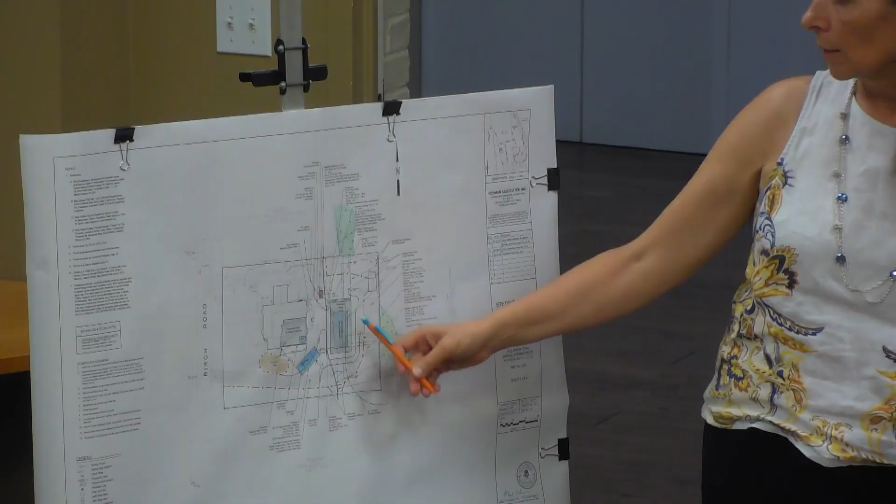But what kind of pipe is it? What's the purpose of it? I understand why you're relocating it, but what is the pipe? What is it conveying? It's mentioned multiple times throughout the application, but it never says what it is. Mike, do you have any input?

It's conveying stormwater, and I think there's a small brook upstream passing through. There's an 8-inch pipe on the uphill side neighbor, and on the downhill side a 12-inch. We had an 8-inch pipe on our property and we're upgrading it to a 12-inch pipe, just like with all the storm events we've been having, just in case.

Thank you. And it continues into the next neighbor? It continues downstream to the next neighbor. And what size pipe do they have? Downstream is a 12-inch, and upstream is an 8-inch, so the controlling factor is the uphill pipe. But just to be safe, and through the recommendation of Tighe & Bond...

...I was wondering why it was increasing, because I saw there are 3 storm drains in the back there too. Yeah, in the grass. What's the story with those? There's one near the pool, one off to the backside, there's like 3 of them in there.

There are two 24-inch catch basins that tie into that, part of that drain pipe. But there's also one to the far right that's not in your drain line at all. I'm curious what that one's for. I think that's just picking up some of the existing surface runoff and sending it into the pipe. Everything is actually tied into that pipe.

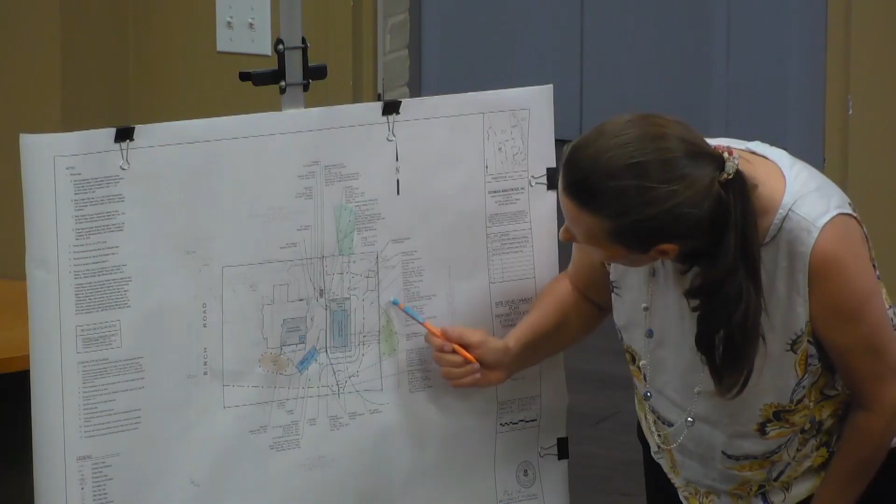So have those catch basins and storm drains been marked on the plan? You ought to have those on there. Do you have all the calculations? Yeah, the existing storm drains are marked on the plan. And a comment from Tighe & Bond recommended that we replace those existing catch basins and put 2-foot sumps in them, because right now they're just yard drains with 5-inch sumps or something like that. So we put a note on our plans to replace those.

With 24-inch sumps. So the overflow pipe from the catch basin, where's that going? That's getting tied into one of the storm manholes in line with that main line. That same line that goes through to the next neighbors downstream, you're tying into that? Correct, and yes, it's got capacity. And where does that eventually come out? God only knows, I'm not sure. Sorry, I took over somebody else's question.

Jesus, I was getting punchy here. The only other question I had is, why are you putting all those plants up on that other side when there's already a monster thick hedge there already? Okay, so...

The purpose of it is to provide a little bit wider buffer to this wetland. But it's already thick as can be in there now. This is all arborvitae, which doesn't really have much value for wildlife. So we're going to add a few red twig dogwoods, which will provide more fruit, food, and shelter. That's good. I'm done, anybody else?

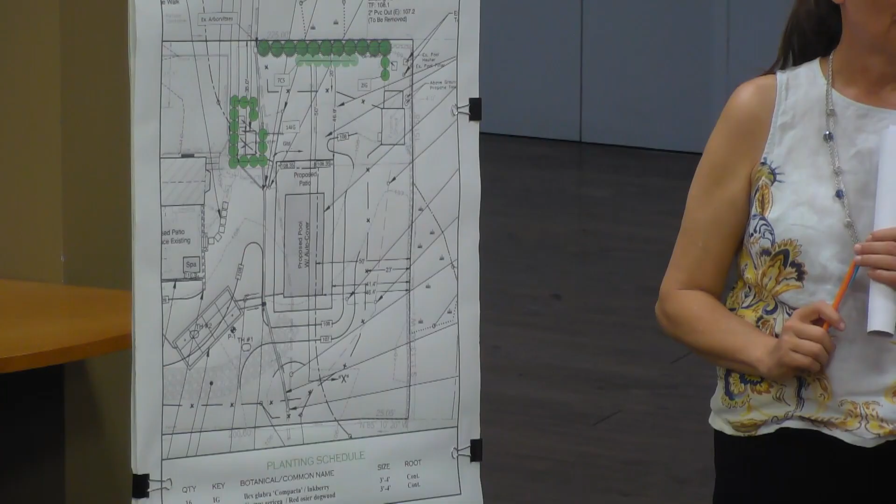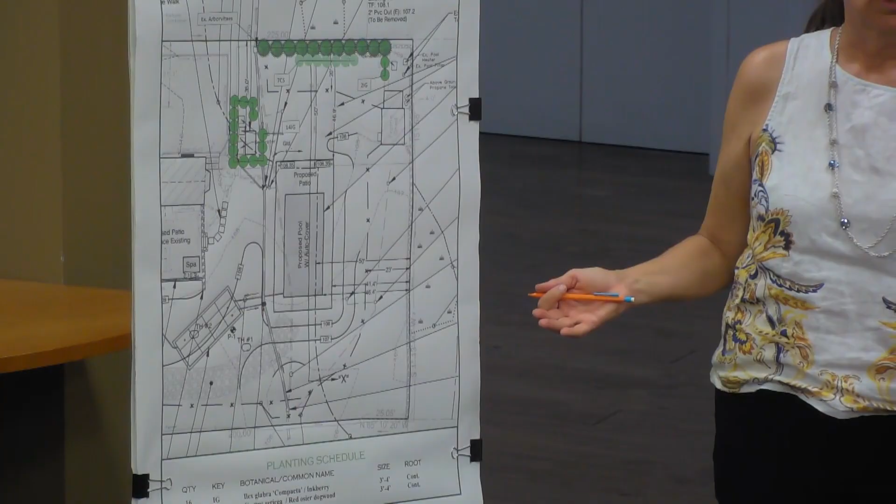On the deer fence that's atop or adjacent to the stone wall, are there any plans to remove the English ivy growing there, or is that staying? There are actually two fences, and I don't know if both neighbors decided to put one up. I was trying to assess this wetland and figure out what this is all about, and I was trying to get over those two fences. It was really difficult, so we don't really have access to this side, and the ivy is actually growing from the neighbor's side into ours. But we can keep that area cut back as soon as it encroaches.

Okay, and you're only regrading not to exceed one to two feet, but how is that gonna change the flow of the runoff? How is it gonna go?

Everything's still gonna be directed to that lower catch basin down to the south corner there, so it's almost like a bowl running through there.

So on the map, basically this whole path drains to this one existing catch basin right here. Okay, so it's still gonna maintain, it's gonna come around, because this elevation over here is higher and it pitches towards that one, so it's basically pitching away from the regulated area.

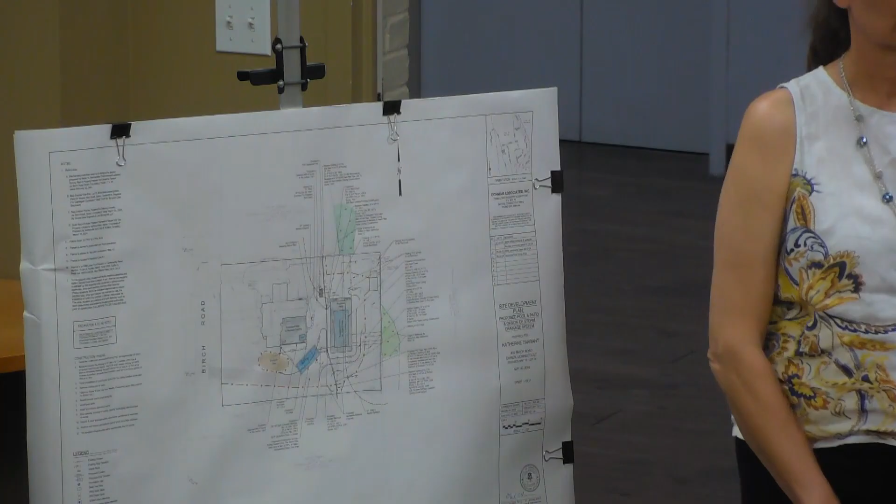Correct, yes. Just out of curiosity, is the new pool gonna be any deeper than the current pool? I think it's 8 feet, I'm not sure on the depth of the current pool. Not that important, but just was curious.

And the pool equipment was north of the shed area, that's being relocated over there, but you're still keeping the other mechanicals there, right? I think there's, these are old, we don't even know what they are, so we don't have to touch them. It's a propane tank and generator, not part of the project. And then, because she's not here anymore, I have to speak up for our former commissioner about the operations and maintenance plan.

Overall, I think it's really good. I really love that you have the log where you can check things, make comments, and it gets signed, and all of that. The only thing I'd recommend is that for the frequency and so forth, instead of just suggesting it be done, I think it needs stronger language - it should say 'shall' instead of 'should'. And I think, since it's at the end of the long report, the owner needs to be aware of its existence. Is it gonna be a separate document given to the owner?

Yeah, it is given to the owner. Okay, but they know they have to do something with it, right? Yes, they should, yeah. I mean, you're gonna have a lot of catch basins - there's a lot of area within there that needs to be maintained, so they do need to be taken care of.